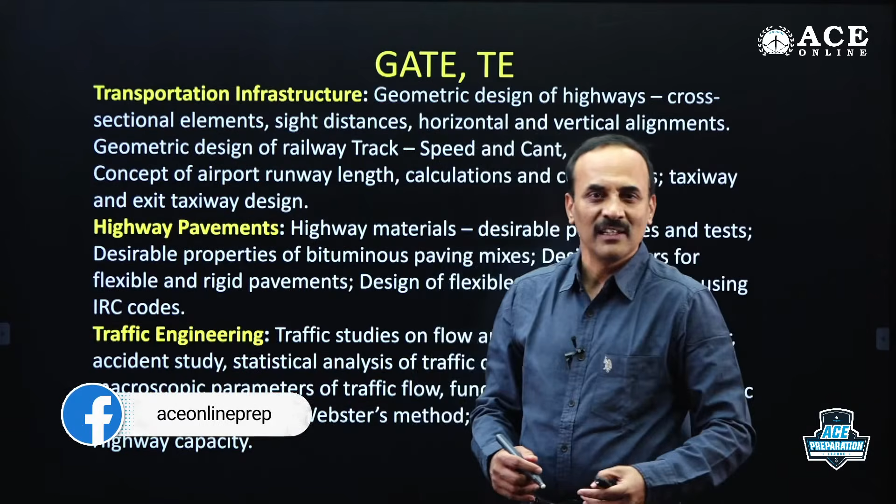Look at the syllabus of the GATE. GATE exam date has come now, 12th February. 2 sessions are there for civil, morning and afternoon session. For civil and mechanical, we have 2 sessions. For remaining all the branches, only one session for GATE. So the number of aspirants for GATE exam will be higher this year, similar to last year, and other branches might have slightly reduced. So coming to the syllabus.

Transportation infrastructure, here mainly geometric design is available - geometric design of roads, railway and airport. That is the first topic. And highway pavements - highway design, including material properties, flexible pavement design, rigid pavement design in the second part. And next is traffic engineering. Sometimes it may create little traffic jam also, so you have to be very careful about traffic engineering. Traffic engineering and the first part, transportation infrastructure, are having good weightage, and middle part has middle weightage.

That is what is generally observed from the previous year questions. So targeting good marks in transportation is easier, and especially if you want to join MTech structures in reputed institutes, you need to concentrate on non-structural subjects of GATE exam, like transportation, GT, environmental - you need to concentrate on these to join structures in premier institutes. That means you have good weightage on non-structural subjects compared to structural subjects.

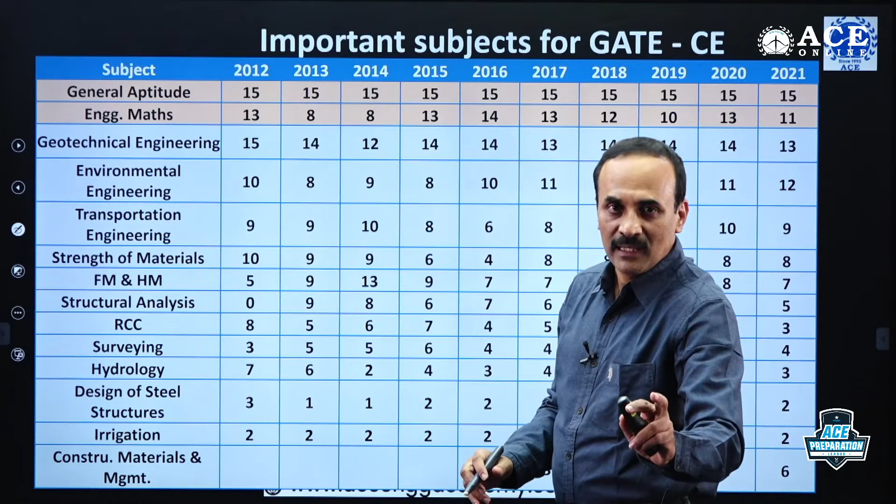You can look at this - transportation engineering weightage: 2012, 9. Slowly it increased, slightly increased in 2014, slight reduction in 2015 and 16, again peaked up in 19, 20, even 21 recent paper, 9. 9 means almost 9%, 9 marks out of 100, 9% - that is a good weightage. And GT is having around 15, 11, like that.

Syllabus point of view, simple, easy, formula oriented with little fundamentals, but if you are very conscious in the exam, if you are concentrating very well in the exam hall, then you can get full marks. Even slight deviation may cause mistakes - be careful. Especially we have to be very careful in the exam hall also, apart from the preparation level. First we will talk about the infrastructure.

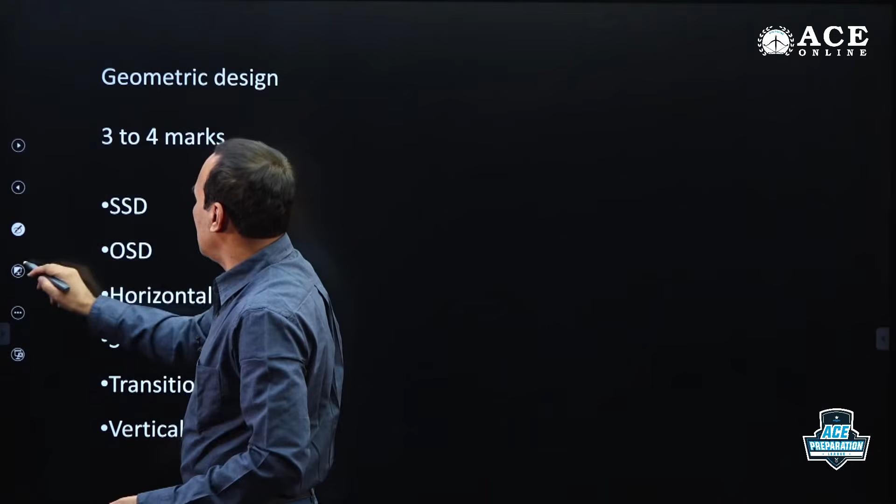Highway infrastructure, the main part is geometric design. The highway geometric design is having 3 to 4 marks of weightage. Most of the times it is touching the higher mark, 4 marks - maybe 1-2 marks question, 1 mark question, or otherwise 1-2 marks question, 1 mark question from geometric design. It's a big chapter, formula oriented, fundamentals of mechanics also required here, as these are the basic important topics I am talking about.

In 2020 onwards, slight variation has come in the syllabus. Starting from geometric design and gradients and all, the historical development and other things have not been included in the present GATE syllabus. The historical development, the plans, the introduction part is not included in the GATE syllabus. That may be there in ESE and other exams like SSC JE and all.

So you start with geometric design from gradients. From gradients, there is a chance of one theory question - maybe IRC specifications they will ask you, like gradient, camber, grade compensation. Grade compensation is an important area from gradients. Afterwards, you have the sight distances. From sight distances, very commonly, very frequently you are getting questions from stopping sight distance - very important area.

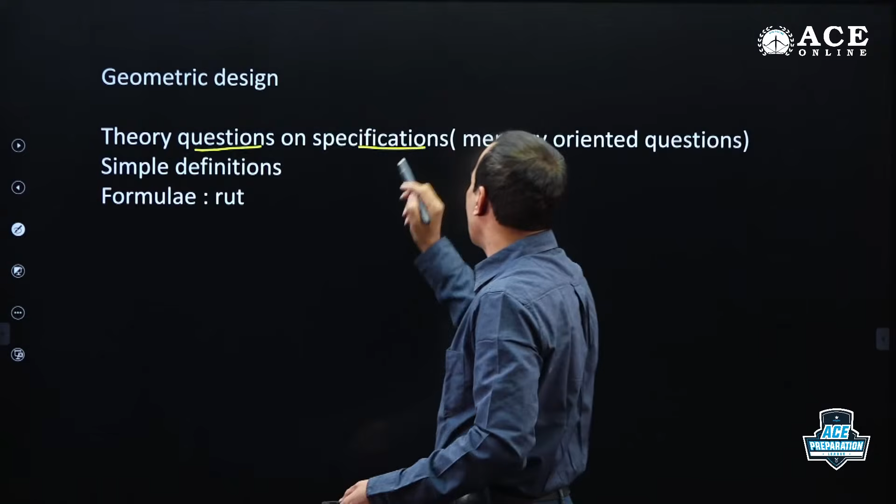Specifications you need to memorize, you need to learn by heart. So definitions may come, simple definitions, and simple instruments whatever you are using for different purposes, like what is unevenness index, how do you measure unevenness index, like that. Some little instruments they may ask you, but all the formulae you need to memorize, you need to learn by heart.

So every day you need to revise the formulae. Morning you need to spare some time, maybe 20 to 30 minutes, and you need to revise the formulae. Even though you are very strong, very intelligent, the top-notch intelligent, you can derive the formula and solve the problem.

But in the exam, the main requirement is time. You need to solve it within time. So you need to work accordingly, you need to act in a smart manner. For that, the formulae you need to learn by heart.

Even though you are topmost intelligent, you can derive and substitute and get the answer, but the person who memorized the formulae can solve the problem just in seconds, earlier than an intelligent person. Finally, the score matters. Whoever is getting a good score and good rank will be treated as intelligent. So be careful about the strategy of preparation.

Formulae are very important, and specifications, not all the specifications of the code book. Important specifications which are frequently getting repeated, those things you need to concentrate on. So the code book is important, but writing all the specifications of the code book is a waste of time, because if you start memorizing all the specifications of the code book, it's a never ending matter. Time is not sufficient.

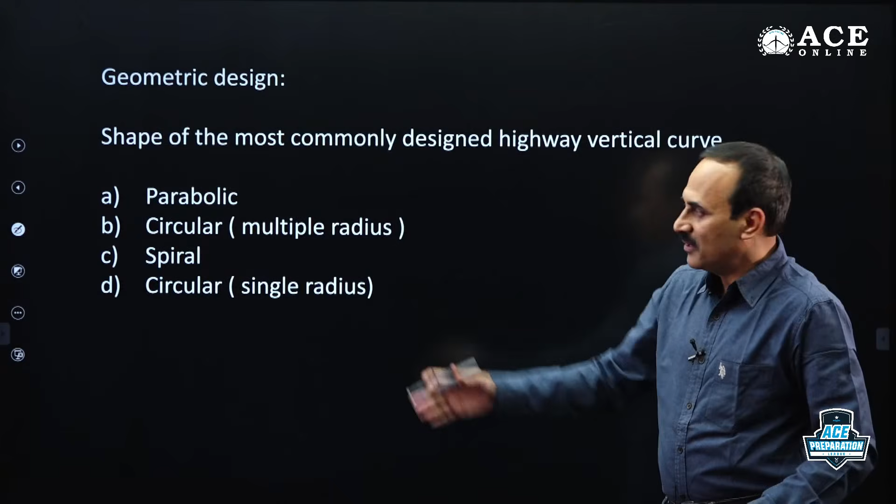1 mark questions may come, straightforward, simple, statement type of question. You can see this: shape of the most commonly designed highway vertical curves. They have not mentioned whether it is a vertical summit curve or vertical valley curve. But whatever it may be, you need to go through all the options and go by process of elimination. Don't just pick up the answer, especially in theoretical questions, you go by process of elimination.

Eliminate one by one, and the most appropriate answer related to the question you need to pick it up. So they are asking you related to vertical curve, what is most commonly designed in highway? Circular curve with multiple radius. Circular arc is the main circular curve we use, and that main circular curve is with a single radius. It is not the vertical curve.

Spiral is a horizontal transition we generally use as per IRC. Circular with multiple radius, we generally use for compound curves or otherwise for reverse curves. You might have come across this in survey. So parabola is the most appropriate answer.

Actually speaking, for summit vertical curves we use second degree parabola, and for valley curves we use cubic third degree parabola. Anyway, vertical curve is parabola. Straightforward question, unless otherwise you have the concept and revision on the concept, you can't pick it up within time. The answer can be picked in maximum 10 seconds of time, not more than that. Such a simple question.

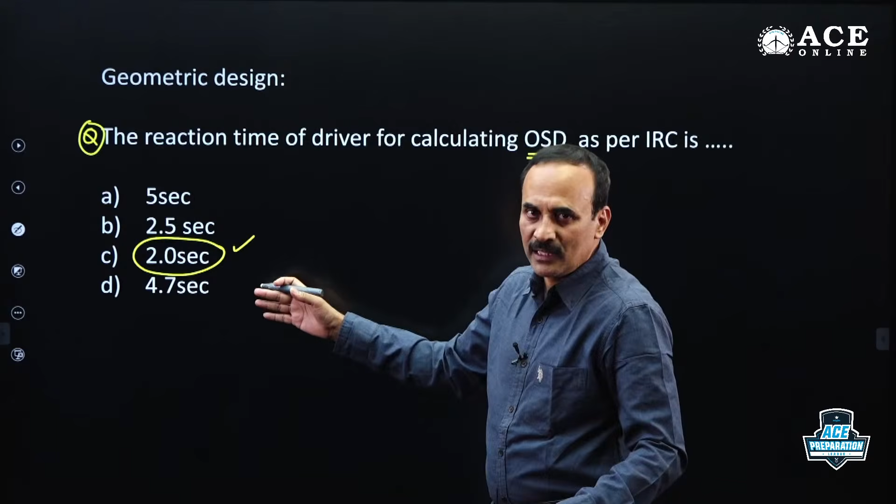In overtaking sight distance, the reaction time is 2 seconds. In stopping sight distance, reaction time is slightly higher, based upon the PIEV theory, it is 2.5 seconds, that you know. So what I mean to say is, read the question properly, whatever is asked, identify and pick up the answer based on that.

They are saying that lateral friction is completely developed, meaning you are mobilizing the lateral friction. So what is the maximum lateral friction possible as per IRC? Longitudinal friction, whatever we use in stopping sight distance, is 0.35 to 0.4. Lateral friction will be 0.15. This is to be assumed because this is not given.

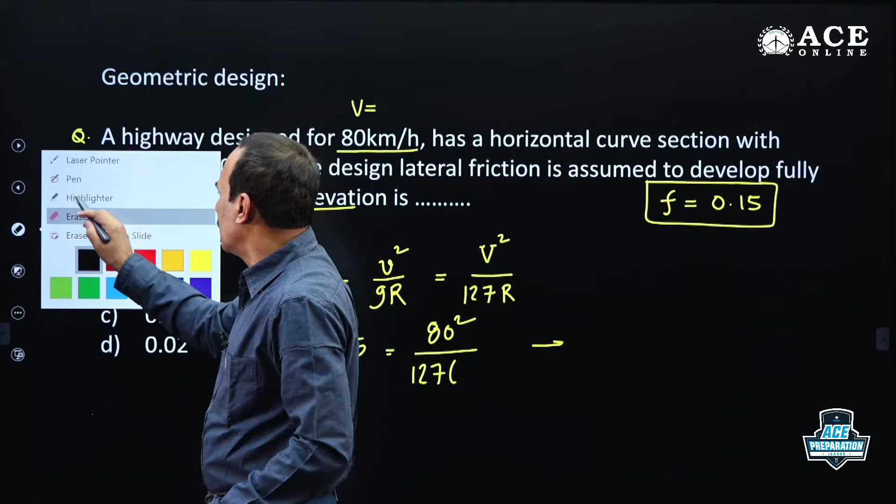Radius is 250 meter. So what is the super elevation, and which option is matching? Okay, most of the people are saying option C, C, C. Let us see - you are saying C, let us see. 0.05, correct. 0.052 will come, you can round it to 0.05, the nearest option.

So it's a simple question only, for this to solve you require... very good, so many people answered it, good, good, good. Okay, so you can pick up the option as option C - a straightforward memory oriented question.

Especially to target good marks, if you want to score around 50 to 60 marks out of 100, simple main questions you just go through and then hit the target. And if you are aiming for 90 plus out of 100, then you need to go for rigorous preparation, nook and corners you need to touch. If your target is around 50 to 60 or 65, 70 marks, the basic fundamental things you rote and practice well, go for the exam, definitely you will get that particular range of marks. If you want to target more than that, you need to go for nook and corners. What some people will do is, they may not have a proper strategy, but they'll focus on 90 plus marks.

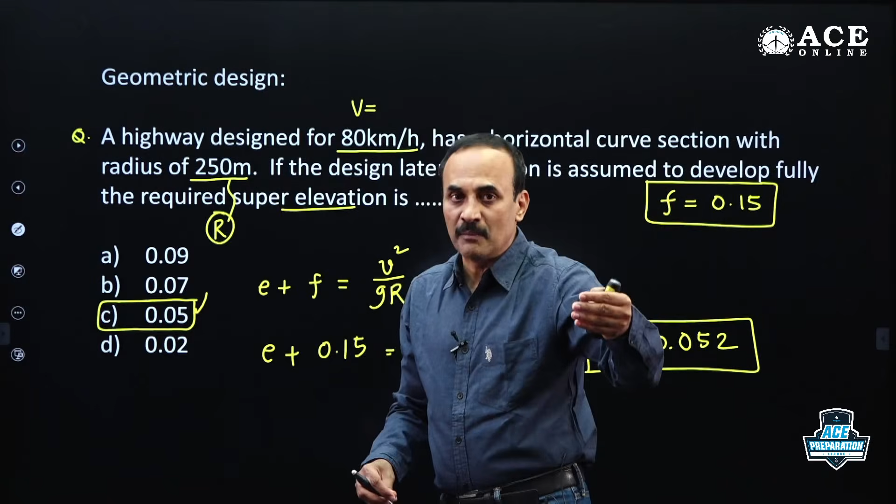Finally, they could not even qualify in the exam. So first assess your level, what is your fundamental strategy at present. You need to assess yourself honestly, and based on that, target your preparation.

Look at this question, it's a simple question based on gradients. They are asking the correct descending order of steepness of the camber. Camber is a cross slope that drains away water. A superior, good quality road requires less camber because it can drain away water easily without much trouble.

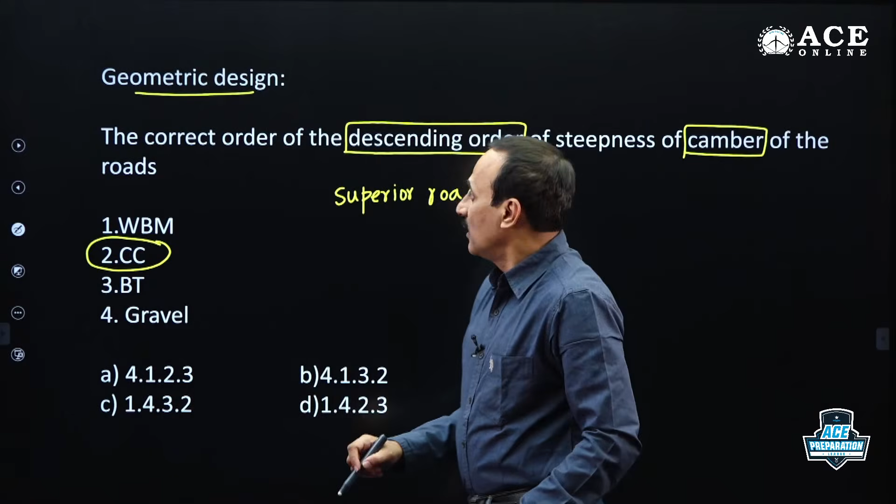Among these, which is superior most? As you know, cement concrete is superior, so it should be ranked 1. You need descending order, meaning high to low, higher value first and low value next. So cement concrete is superior most. Which is inferior among all? WBM, BT are there, but gravel is inferior among all. So inferior should have the highest rank number, meaning you need to start with 4.

In the options, the first should be 4. That means option C is gone, option D is also gone, two options eliminated. We have the tug of war between option A and option B. After gravel, the next inferior is WBM, so after 4, 1 should come. Here 4, here 1, here 4, here also 1 - so we can't pick the answer yet. Go for the next one. After WBM, BT will come, and superior most is CC, so next 3 should come, meaning here next 2 is there. 2 is there means you can eliminate option A, and the available option is option B. Like that, go by process of elimination.

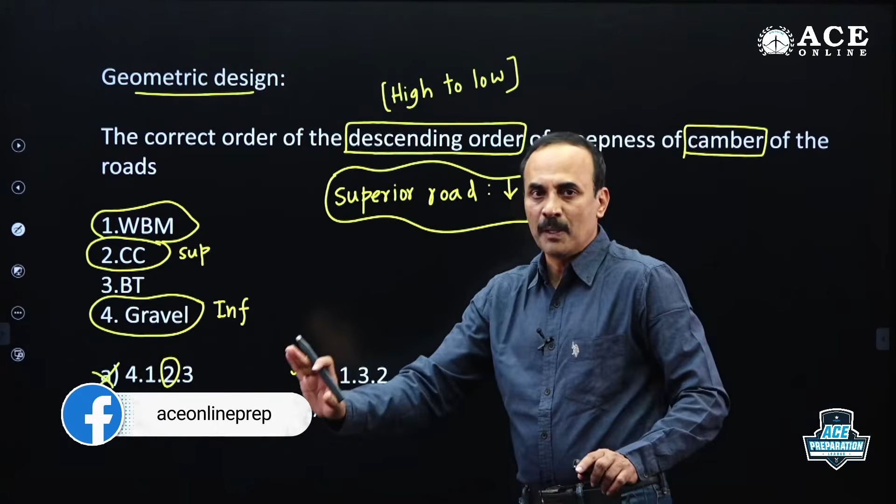No need to memorize the camber values to answer this. If you have a little idea on this point, you can pick up the answer. That's how you prepare for the exam. Most people answered this correctly - Harish, Anand, Ajay - all gave Bombay as the answer, which is correct. We will move to the next question.

This is also a fundamental, mechanics-oriented question. Look at the question - such questions are very common in ESE, and there may be a chance of such a question in GATE exam also. You require linear motion equations for solving these problems. Read the question: a vehicle was stopped in 2 seconds by fully jamming the brakes, by full pressing of the brake.

The skid marks measured 9.8 meters, so the distance skidded on the road is 9.8 meters. The average skid resisting coefficient, F, is the coefficient of longitudinal friction or linear friction that they are asking you. So what's happening is you are going by a car.

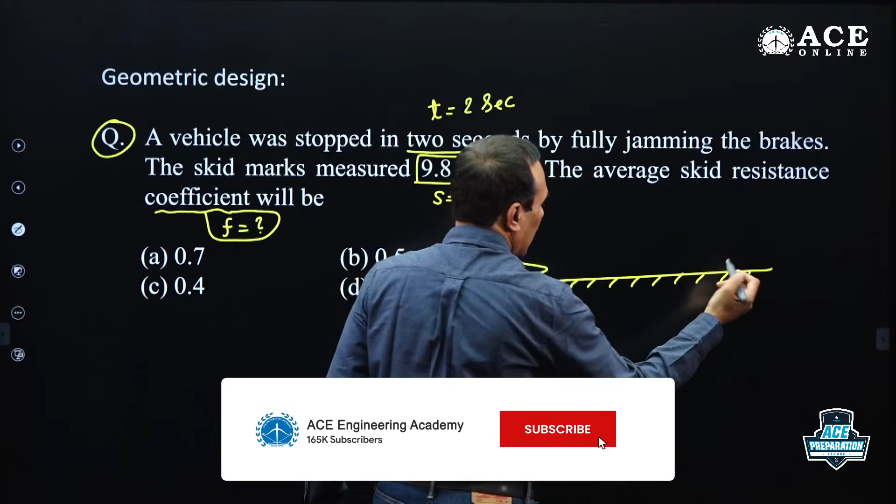Assume you are going by a Benz car. You suddenly stopped it - sudden application of brake is done. So the vehicle skidded for 9.8 meters, that is the skid distance, and finally it has stopped. Final velocity is 0. What is the time of travel? 2 seconds. Initial velocity I don't know - it is not given, and not required either.

But you require the coefficient of longitudinal friction. You know that the coefficient of longitudinal friction is equal to retardation divided by acceleration due to gravity - A by G. A is retardation: once you apply the brake, the velocity decreases, and the rate of decrease of velocity is retardation, while the rate of increase of velocity is acceleration. So here retardation comes after the application of brake. You use the first linear motion equation to relate V and U.

The final velocity V is equal to U plus AT. Final velocity is 0 because the vehicle stopped after the application of brake - this is given to us. U I don't know, acceleration also I don't know, but it stopped in 2 seconds, so initial speed is equal to minus 2a.

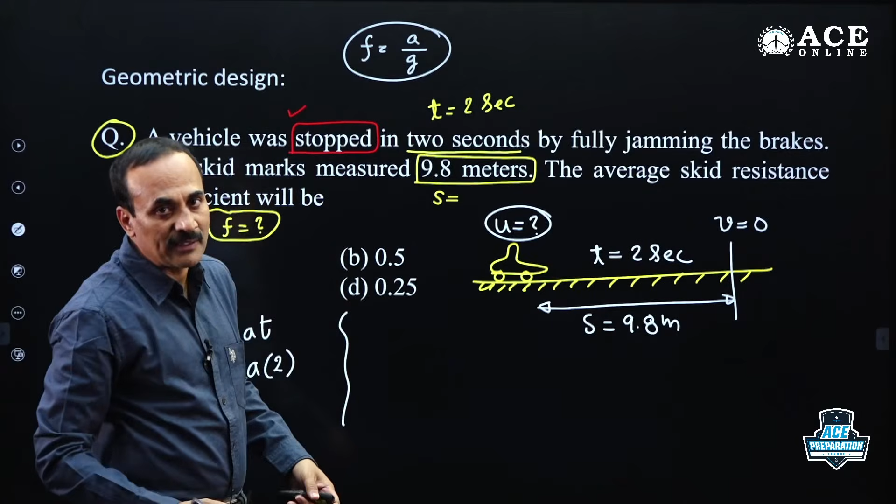From this equation, now you can use any other linear motion equation so that I can make use of displacement, nothing but the skid. I want the retardation finally. Shall I use S equal to ut plus half at square? You can use it. Otherwise, if you want, you can use v square minus u square equal to 2as. Any one - all are derived linear motion equations, you should get the same answer whether you use one or the other.

What is final velocity? That you know, 0. Initial velocity I am substituting as minus 2a, whole square equals 2as. What is this s? 9.8 meters. Now you can simplify and find the retardation: 2a square, the a gets cancelled, 4a minus of minus 4a, 4a is equal to 2s. Is it s by 2? 9.8 by 2.

Is it correct? Check up. Yes. Now what is f then? F is equal to a by g.

G is 9.81, or 9.8 you take it. 9.8 by 2 into 9.8 you take it. 9.8, 9.8 gone, 1 by 2, 0.5 comes into the picture.

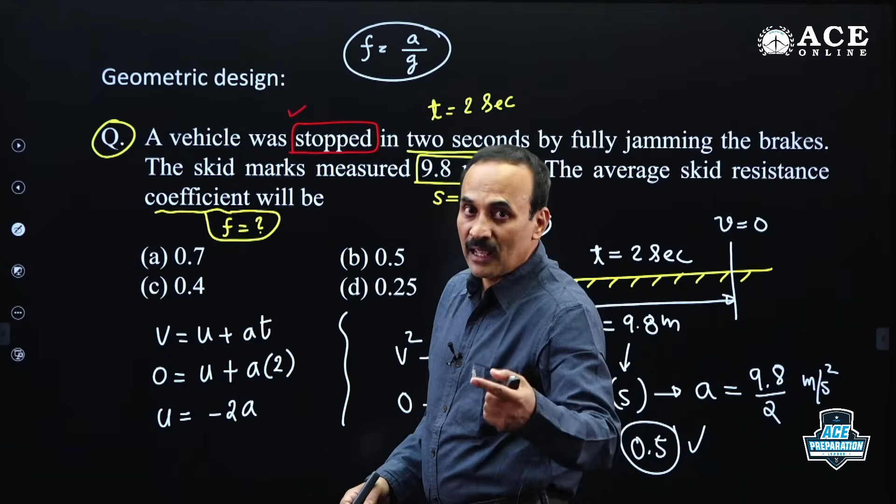So the option is 0.5, you can pick it up.

Okay please. Yes. Abhijit, Vishal, Ajay, PM, so many people give an answer. Very good, very good, very good. Bombay, Bombay, Bombay. Yes, Bombay.

This was a memory oriented question given in GATE previously. I have given this here because don't unnecessarily get panicked by this question. If such questions are coming, don't unnecessarily get panic in the exam hall. They'll give you some critical questions in the middle of the exam so as to decrease your confidence level.

Once you are a stable minded fellow, you leave the question and go to the next question. And someone with a slightly fluctuating brain, fluctuating mind, will look at the question, get panic, and their confidence level will go down by 20%. So for that, they'll give you such memory oriented critical questions.

That is what generally the question setters target on the students. Because question setters were also once upon a time students, they have come through all your stages and gone to that particular level of setting question papers. They know your feelings, they know your mental condition in the exam hall.

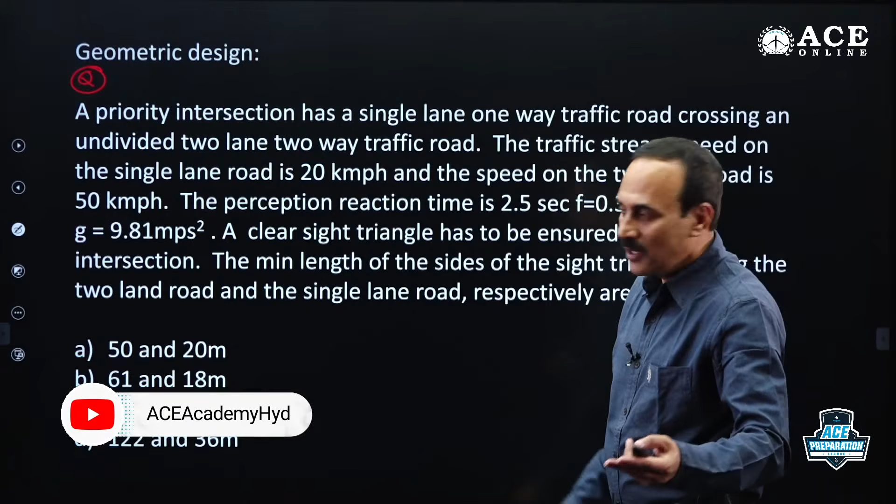You see, priority intersection. Even actually speaking, by the time this question appeared in the question paper, I was not aware of this. After that, I have gone through the code book and selected the answer. There is a condition, because going through all the specifications of the code book, writing all the specifications is not a part of the real requirement.

GATE exam is Graduate Aptitude Test. It talks about your aptitude, it checks about your aptitude. If such questions are there, only the people who are working in that particular area can answer the questions. Very few people who are in research of this particular area can do it.

Otherwise, people may think that there is something but can't recognize, can't recollect. Okay, don't worry about such questions.

What is asked here? A priority intersection has a single lane one-way traffic road crossing an undivided two-lane two-way traffic road. Two roads are crossing each other. The traffic stream speed on the single lane road is 20 kmph given,

and the speed on the two lane road is 50 kmph given. Acceleration due to gravity also given. Remember, in GATE exam, they will give you almost all the data. Very rarely, very common specifications they will skip. Something like in the previous question, lateral friction was skipped. Like that, very common specifications they will skip. Otherwise, they will give you.

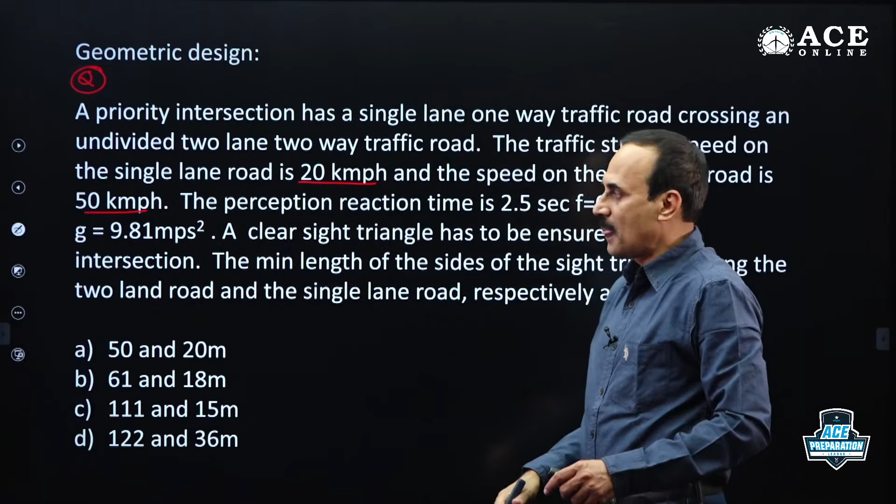Even acceleration due to gravity is given, you see. It's a GATE question. So what they are asking is, the clear sight triangle has to be ensured at this intersection. The minimum length of the sides of the sight triangle along the two-lane road first and the single lane road next, respectively, are.

Actually, there is a junction like this. Yes, this is in a priority intersection. In a priority intersection, vehicles are allowed to move with priority. That means there will be signals, there may be other instruments or police to control the traffic. That is why a priority intersection will have priority movement of vehicles. Now, this is a minor road.

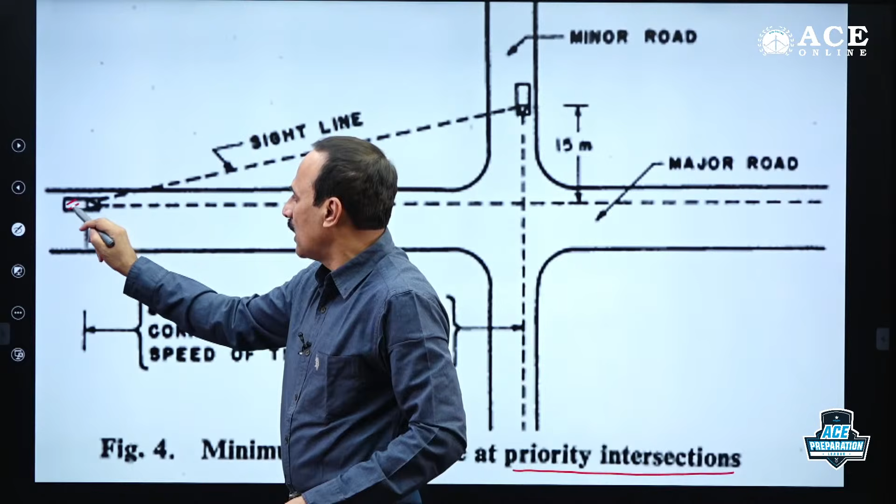North-south road is the minor road, east-west road is the major road. This vehicle is coming on the major road and this vehicle is coming on the minor road. This driver should see that vehicle, and this driver should see the vehicle from a certain distance, so that there is no chance of accident here.

For that, the major road requires more distance. They say you require a gap distance of V into T, where V is the design speed of that particular road and T is 8 seconds of time. This much distance is required for this driver to reach here.

And what about the minor road? For minor road, 15 meters is given - minimum 15 meter distance is required. That means at a distance of 15 meters, this driver should see the opposite vehicle on the perpendicular road.

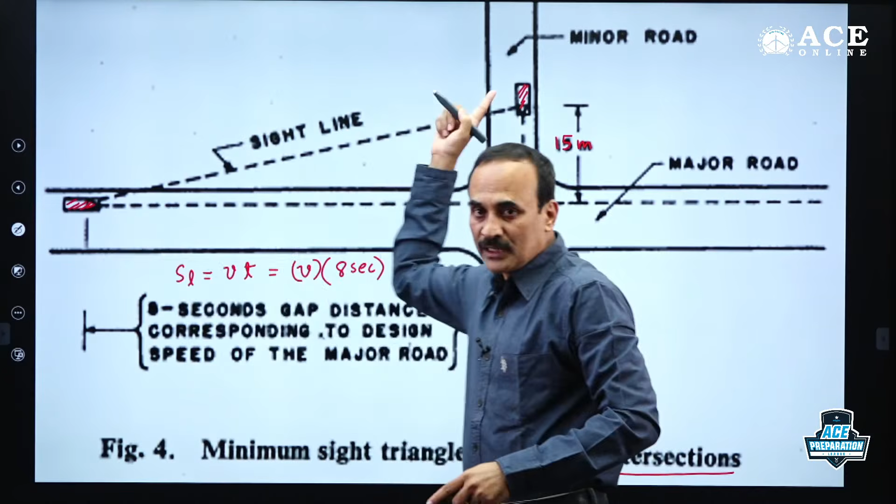And this driver should see the vehicle at a distance of V into 8 seconds. Then this fellow can control the vehicle and avoid the accident. If this is 15 meters, this fellow can control and avoid the accident. That means this is one side of the triangle, this is the other side, and this is the diagonal, given by the line of sight.

In this vision triangle, there should not be any sort of obstruction - no building, no compound wall, no parked vehicle, nothing. This should be clear. Then at this particular point, there is no chance of accident. As a designer, you need to manage it like that.

Even if by chance an obstruction is recently constructed, you need to go and dismantle it, you need to remove it. Nothing will happen because you are acting as per the provisions - even a court of law will not say anything. You need to give notice to the people, and if any illegal construction is there, you need to dismantle it. This area must be clear.

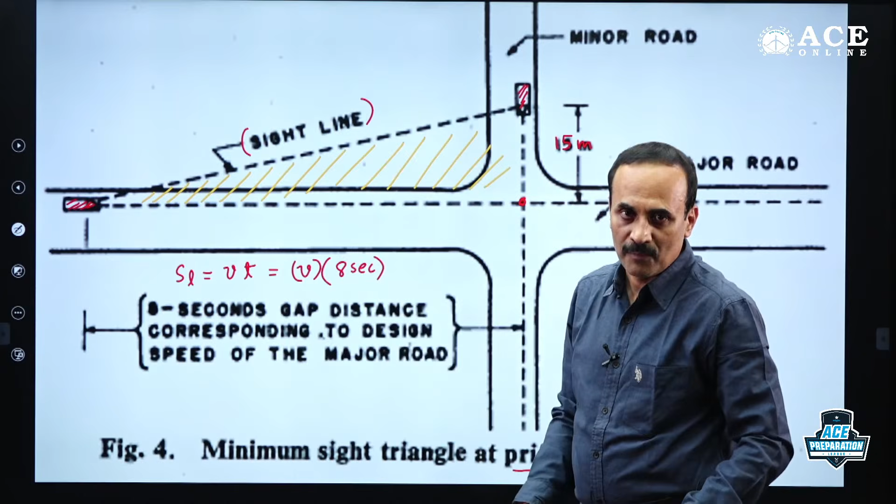This is for a priority intersection where there is prioritization by signals, police, or any other control. So minor road is 15 meters. Who will remember all these things? So they are asking you in the question as a priority intersection only.

And they are asking you: a two-lane road is the major road and a single-lane road is the minor road. What is the side of the triangle for major road and minor road? You know, for minor road it is 15 meters, just now we have taken it - no other case is it 15. On a single lane minor road, the side of the triangle is 15 meters, that we know.

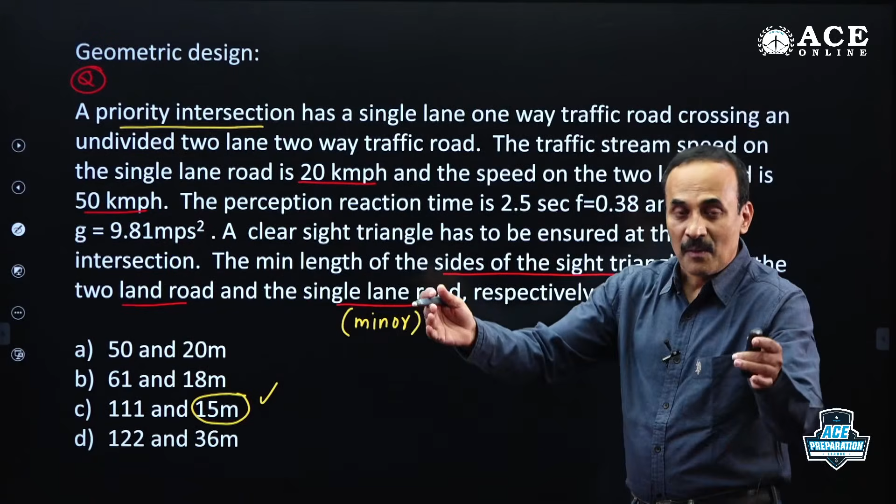With that you can pick up the final answer. It will be the design speed of the major road into reaction time of 8 seconds, the gap distance - it will be there, no need to calculate and cross check. If you have the fundamental and can recollect it in the exam hall, picking up the answer is very simple, but going through such fundamentals right before the exam is a very difficult task.

After the exam we saw this question and checked various codes and picked up the answer - that is not the correct approach. Prior to the exam you should have this in your mind. So whatever is given here is for an uncontrolled intersection. This is also given in IRC 66. This is okay, because uncontrolled intersection means no control, no police, no signal, nothing.

So this fellow is coming on this road, this vehicle is coming on this road, and this vehicle is coming on the other side of the road. There should not be any sort of accident here. So for that, this fellow should have a stopping sight distance of, say, SSD1.

That SSD1 is based upon the design speed of this road. As it is V2 given, I will make it SSD2 for road number 2, based upon V2. And what about this distance? This will be SSD1, based upon the design speed V1.

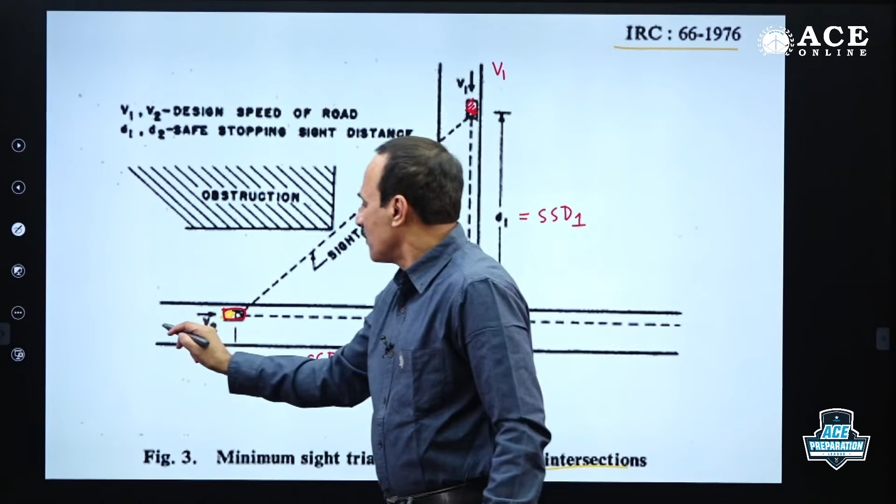Calculate SSD2 and SSD1 - this is one side of the triangle, the other side of the triangle, make the triangle, and this is our vision triangle. In this triangle, nothing should be there - no obstruction, no bushes, no building, you should not even park a vehicle.

Even by chance, if somebody parked a vehicle here looking at this empty space, there is definitely a chance of an accident and havoc occurring here. You have to be very careful about this point. That's why even parking a vehicle is not allowed.

That's why what people do is make this area slightly rough so that vehicles feel reluctant to park - it should always be kept empty. They make it slightly rough, even keep some small boulders, or otherwise grow some sort of garden whose height may not be more than 1.2 meters, the height of the driver's eyesight. So, such rare questions, don't target them.

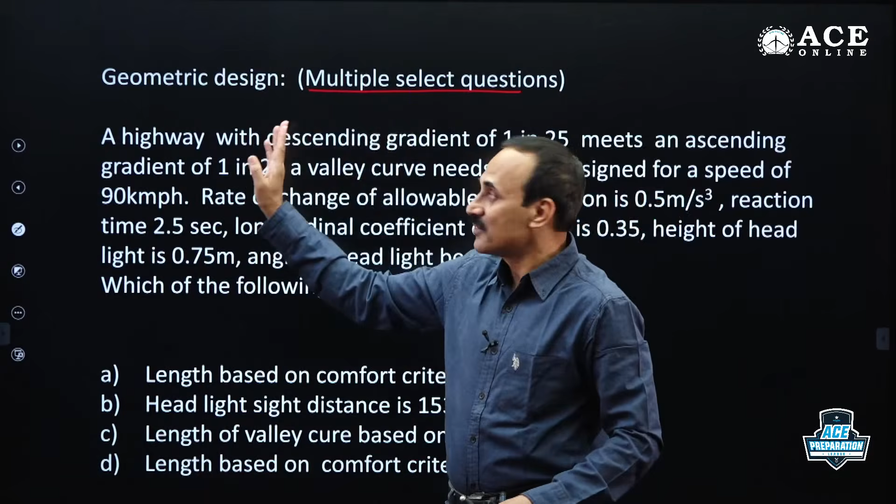We have three types of questions in GATE, as you know: multiple choice question, numerical answer question, and multiple select question. The problem with multiple choice questions is there is a negative mark - 1/3 negative comes if you put a wrong answer. In case of numerical answer question and multiple select question, there is no negative marking.

That is one side of the story, happy point. Multiple select questions were recently added in GATE 2021, no question was there in previous year papers, but in CSE there were so many multiple select questions in their recent paper. Computer science, electronics had one question, but civil had none. In future it may come, because this multiple select question will have 4 choices, and more than one may be correct. If you pick up all the correct answers, only then you get full marks, otherwise 0 marks, no chance of negative.

See this: a highway has a descending gradient of 1 in 25 meeting an ascending gradient of 1 in 20 on a valley curve. Oh, they are talking about valley curves. This needs to be designed for a design speed of 90 kmph. The design speed is mentioned as 90.

The rate of change of allowable acceleration is 0.5 meter per second cube - this is the rate of change of centrifugal or radial acceleration. Reaction time is given as 2.5 seconds for average driver based on PIEV theory. Longitudinal coefficient of friction is 0.35.

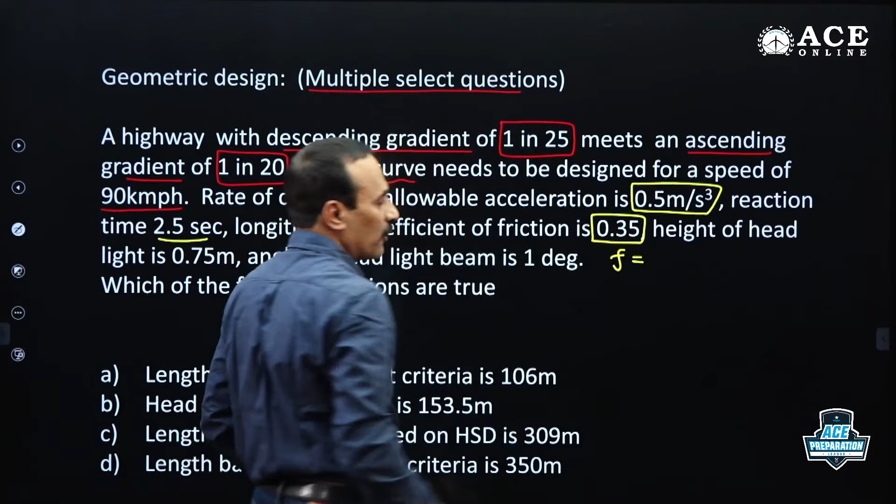Longitudinal coefficient of friction, we need to use it in SSD. Height of headlight is 0.75 meter, we call it H1. Remember, this is a valley curve, and angle of the headlight beam is 1 degree upwards, so as to cover more range of the headlight - the company setting of the headlight is 1 degree up, slightly up.

Which of the following options are true? Look at what they are asking you. Length based on comfort criteria - comfort means centrifugal criteria. Next is headlight sight distance they are asking in the second option. The third is length of valley curve based on headlight sight distance. Headlight sight distance is nothing but stopping sight distance.

Now for length based on the comfort criteria, two things are given, one may be wrong. 106 is given in option A, 350 is given in option D, one may be correct among them. You need to identify if option B and option C are correct or not.

This is a valley curve. First we will calculate the deflection angle of the valley curve, 1 in 25 and 1 in 20. Let me go to the next slide just for checking purpose. This is a valley curve: descending is 1 in 25, minus - I am taking minus for descending. Up is plus 1 in 20. So you have the valley curve in the middle like this.

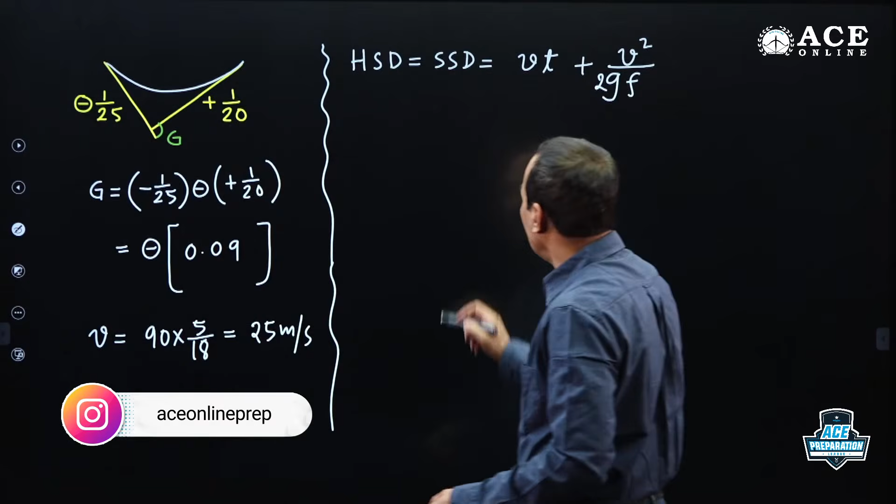So substitute 25 as the speed. The reaction time of the driver is given to us. How much is the reaction time? 2.5 seconds.

V square, you need to use an online calculator. 2 into G also given to us. Is it given? Acceleration due to gravity is not given, you assume 9.81. Coefficient of friction, longitudinal friction 0.35.

Simplify and give me what is HSD, nothing but SSD. Yes, yes, please. Paran Raj got 153.67. 153 point... okay, 153 Ajay will take 153.5.

Okay, first part is over. Answer is matching, matching, matching.

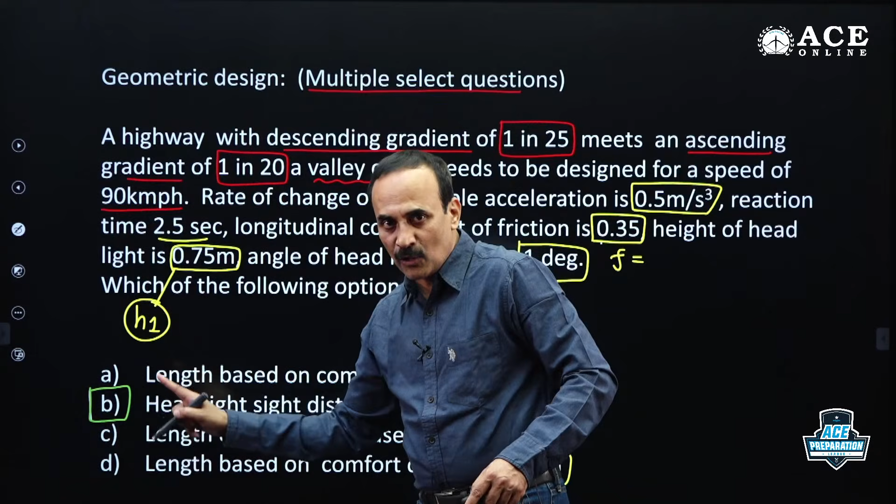If you select two options, both can get selected for a multiple select question. In a multiple choice question, if you select option A, that gets selected. If afterwards you select option B, option A's selection will go away and option B gets selected. That is what generally happens.

So headlight sight distance first is correct, B is correct. Length based on comfort criteria we will take. So what is length based on comfort criteria? Comfort or centrifugal criteria?

Centrifugal force will be causing a lot of trouble on the valley curve because weight is acting down, and centrifugal force is also acting down. On summit curve, centrifugal force is not a criteria. On valley curve, centrifugal force is a design criteria.

We will take two cubic parabola transition curves and join them symmetrically. LS is a cubic parabola transition curve, so two parts joined symmetrically. This is GV cube by rate of change of acceleration under root, nothing but whole power 1 by 2.

Substitute all and give me the answer. Don't forget to take 2. Don't forget to take whole power 1 by 2, or root. People may forget this multiplication of 2, some people forget this root. Be careful, these are the common mistakes people generally commit.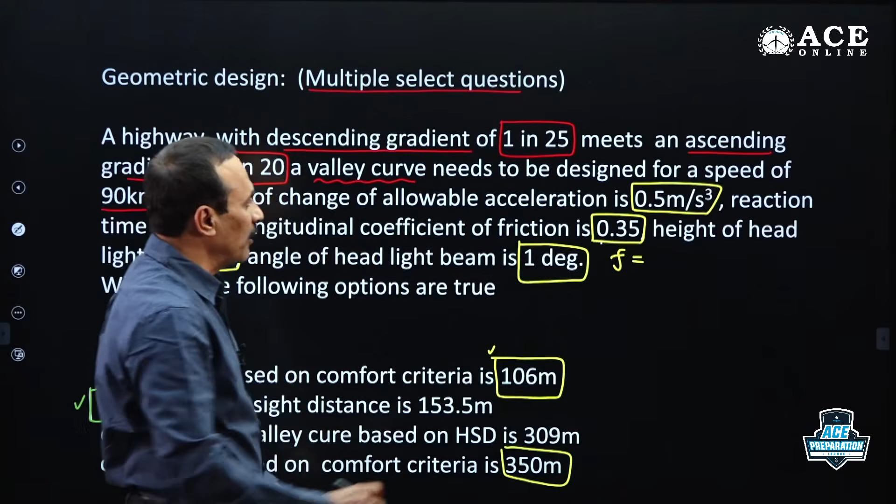So speed is 25, G is 0.09. Rate of change of centrifugal acceleration is given, it is 0.5 meter per second cube. For valley curve, IRC recommends using 0.6 meter per second cube, but they have given 0.5, so whatever is given you need to choose it. So take 0.5, root over.

What is the answer please? 106. Correct, Mahesh, Satish, Ajay, yes.

Is it matching as the correct option? Comfort criteria, length based on the comfort criteria is 106. So option D is gone, option A is the correct option. I will put it in green color, correct.

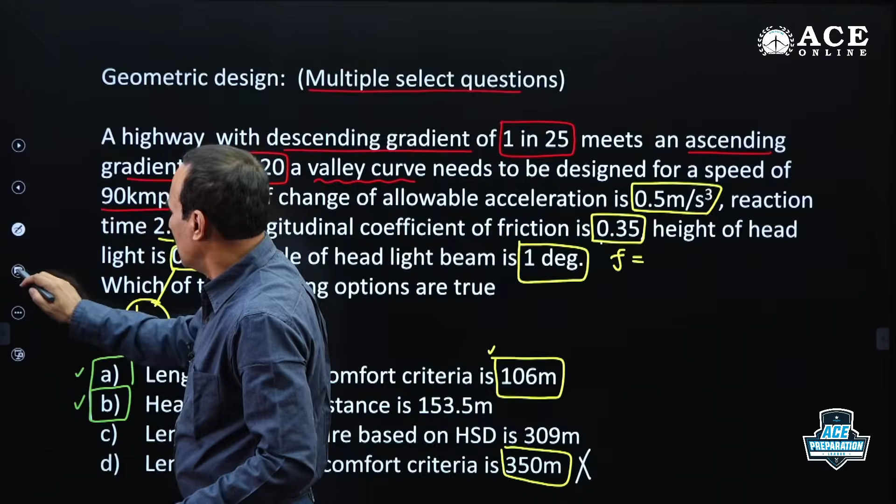Length of valley curve based on headlight sight distance is what they are asking. So headlight sight distance is also based upon HSD, nothing but SSD. So headlight sight distance, HSD criteria, HSD nothing but SSD criteria, sight distance at night.

Here there are two cases, we need to assume L more than or equal to S, nothing but HSD. In most cases, this is the criteria which is generally suitable for us.

The value is GS square divided by 2H1, the height of the headlight above the road surface, 2S. S is the sight distance, nothing but HSD, tan alpha. Alpha is the angle of the headlight beam, alpha is taken equal to 1 degree. Height of the headlight over the road surface is given as 0.75 meter.

And S is our HSD, whatever you have calculated, that you substitute. G is 9% gradient, 0.09. Now give me what should be the length.

Let us see how many of you solved it. Oh, A, B, C are correct. Solanki, Raj, very good.

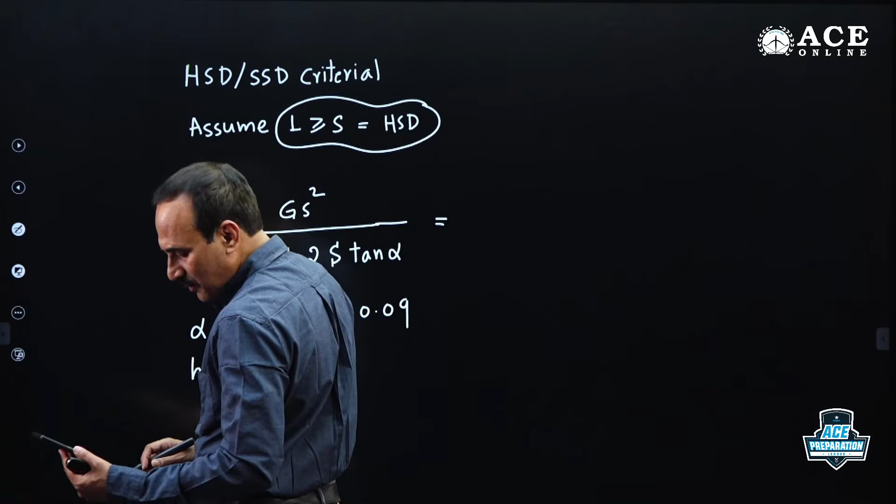Jerry, so this is... what is the value? 306. 308.6, okay, 309.

After you calculate this L value, you need to check whether the assumption is correct or not. L is 309 - is it more than S or not? L calculated is more than our S, HSD, that means the assumption is correct. If by chance the assumption is wrong, you need to go for the second formula and recalculate the length again. So presently the assumption is okay.

The HSD value, whatever you have calculated, is 153.5, right? Okay, length is 309, which is more than 153.5. Assumption is correct. You can pick up the answer - which is the correct option? So 309, this is also correct option. So answer is A, B, C are correct.

Delhi Khan, you can select the three options. Time taking question. Okay, we'll move to the next.

Time is almost 6:57. Look at the question, I'll just give you the procedure. A horizontal circle - this is based on the setback distance, this is based upon the setback.

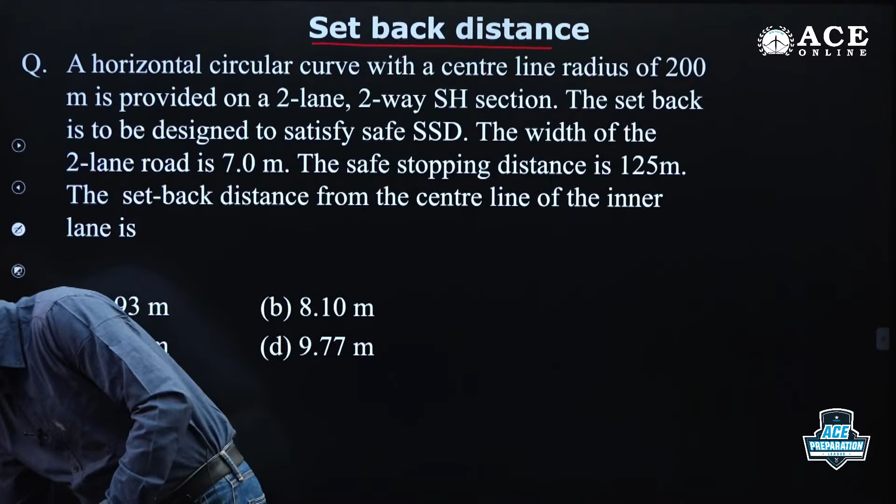A horizontal circular curve which has a center line radius. Radius is always taken up to the center line of the road only. If radius is 200 meter, that is from the center of the radius to the center of the entire road. Radius, if somebody says radius, it is center of the entire road only.

On a two-lane, two-way highway it is given. Two-lane, two-way is a two-lane road. What is the width of the road is also given as 7 meter. The safe stopping sight distance is given as 125 meter. The setback is to be designed to satisfy safe SSD. It is mentioned - actually, two-lane, two-way road, overtaking is also allowed. But they wanted to design the setback only based upon the SSD.

If you don't read this line, whatever is underlined with red color, you miss the answer. It's a two-lane road, overtaking is allowed, but they don't want to allow overtaking sight distance. They wanted to calculate the setback distance - nothing but the distance of the obstruction on the inner side of the curve based upon the safe SSD.

Okay, safe SSD value is also directly given to you. The setback distance from the center line of the inner lane they are asking - this point is also slightly crucial. I will underline with green. From the center line of the inner lane they are asking. We will check up. We will go to the next slide.

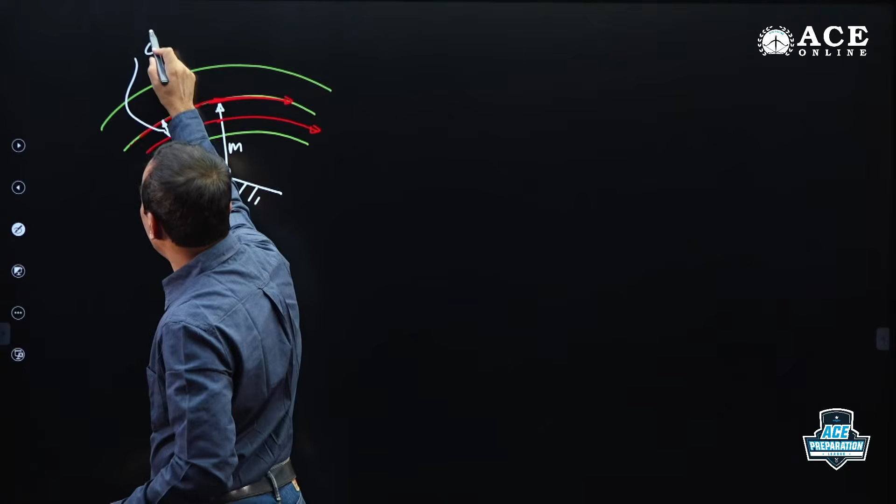Small d - how much is small d value? Total width of the road is 7 meter, that is nothing but 3.5 here, 3.5 meter here also. So small d is 3.5 by 2, nothing but 1.75 meter.

First of all, the setback distance we need to assume - if nothing is specified, we always assume L is more than or equal to S, which is presently safe SSD. How much is the safe SSD now taken? 125 meter. Assume L more than or equal to S - that's what we generally start.

So setback distance for multi-lane road is R minus D you need to take - remember this? Cos alpha by 2. This setback distance is from the center line of entire road to the inner side of the obstruction.

Now alpha, how do you calculate alpha? Alpha is based upon the arc length. Arc length is the sight distance, equal to R minus D, because the sight distance is for the critical vehicle which is moving on the center line of inner lane. So arc length has a radius of R minus D, and we require arc length equal to the sight distance, the safe sight distance, R minus D into alpha.

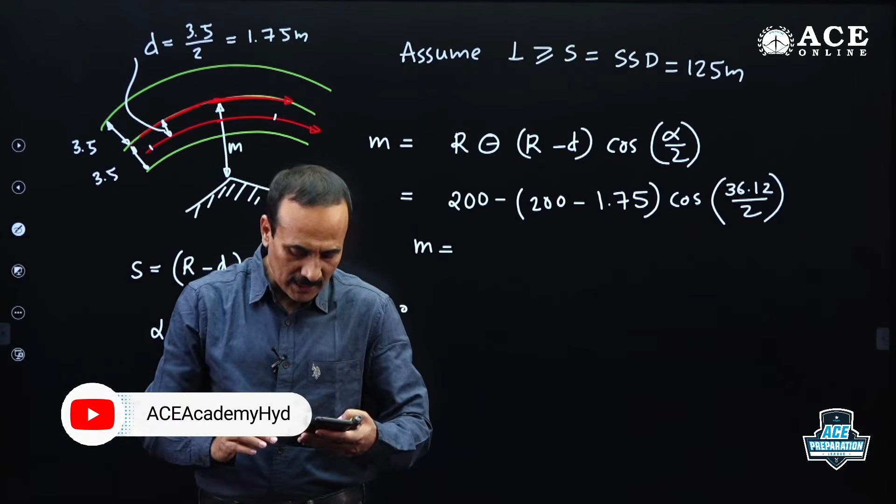So this is the setback taken from center line of entire road to the inner side obstruction. What is the value please? Yes, 36.12 is alpha. Prasad correct, Nagsai correct, Ajay correct, Jerry correct, very good.

Now what is this M value? 11.52. But what they are asking you in the question is, that is a twist in the GATE question. They are asking you setback distance from the center line of the inner lane. Whatever you calculate is directly from the center line of entire road, but they are asking you this distance, m dash distance.

So from the center line of inner lane to inner side obstruction is m dash, that will be m minus d, 11.52 minus 1.75. If you are not reading the question carefully, there is a chance of committing mistake like this. Around 20 to 30% of the people, they calculate m and substitute that as an answer. But actually that is not the correct answer. M minus d is the correct answer. That's what we require to substitute.

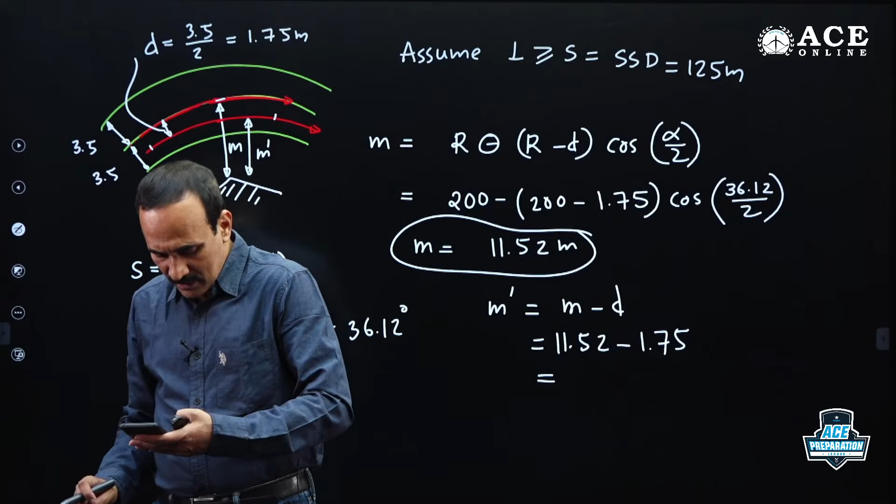So what is m minus d? Yes, very good. 9.76.

This is the way we need to solve the questions. In gate question, if you are not reading the question properly, you can go onto the negative if it is a multiple choice question. Otherwise, you can touch 0. Pavement design carries 1 or 3 marks, not more than that. Not so critical and important.

We have flexible pavements and rigid pavement, and targeting questions here will be easy. In flexible pavements, they are asking you mainly the vehicle damage factor calculation, or convert everything into standard axles. Vehicle damage factor or number of standard axles. What is standard axle? The rear axle of a lorry, we treat it as a standard axle. Rear axle of a normal lorry will have left 2 tires, right 2 tires, connected by axle. So dual wheel single axle is the standard axle.

What is the load acting on that? As per IRC 2018 version, IRC 37 2018 version, 80 kilonewton is the standard axle load we'll consider. We need to convert everything into standard axles. We count the traffic on the road, we'll take all commercial vehicles. Commercial vehicle is nothing but the laden weight more than 3 tons. Laden weight means dead load plus live load more than 3 ton, we call it a commercial vehicle that can damage the road. That's why we consider only commercial vehicles in the design of pavement. Car, cycle, rickshaw, auto we don't consider because they won't damage. Lighter loads won't damage the road.

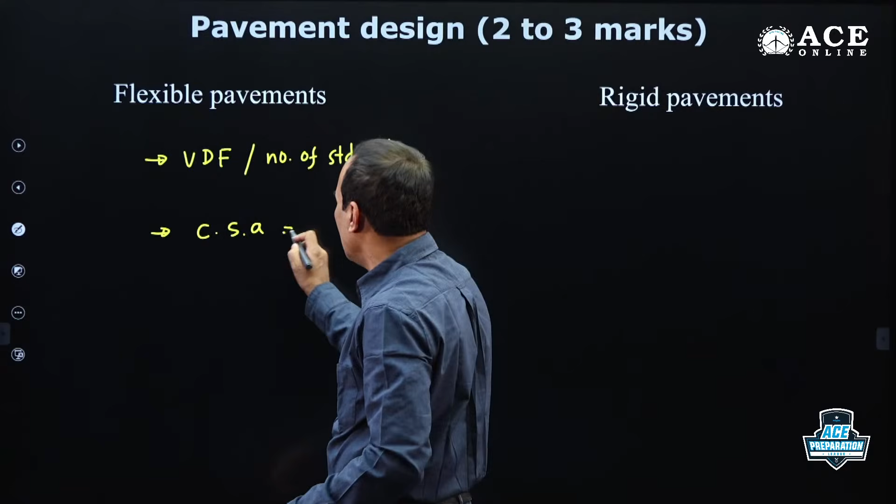You remember that formula? 365 days of a year divided by R, probability based formula, 1 plus R power n minus 1 into the traffic at the end of construction is A, in terms of CVPD, commercial vehicle per day, lane distribution factor, vehicle damage factor. So vehicle damage factor calculation is important. That vehicle damage factor we'll use it in the cumulative standard axles in the life of the pavement.

A is the traffic at the end of the construction, not at the end of the life. A is commercial vehicles per day at the end of construction, nothing but beginning of the life. D is the distribution factor. The distribution factor gives you traffic on a critical lane if the total traffic is known to you. The lane distribution factor you need to know by heart because sometimes in the question lane distribution factor values they may not give you, you need to know it by heart. There is a table in IRC, you might have come across that. This is what is generally asked in flexible pavement design.

Very commonly asked areas to calculate cumulative standard axles, and GATE point of view very important.

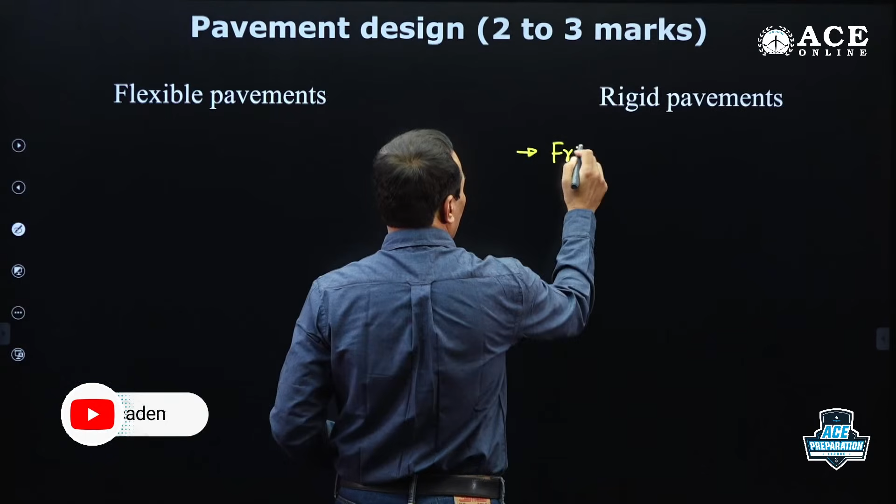Frictional stress calculation they may ask you. We have load stress, warping, friction. The frictional stress calculation you just go through, because that is based upon logic, based upon equating frictional force equal to resisting force. So frictional stress generally comes because of seasonal variation of temperature. Warping is because of daily variation of temperature.

So frictional stress calculation is important for us. Apart from that, the load combinations, critical load combinations. There is a chance of question on this, because you can solve the problems on critical load combination within specified time.

Three critical combinations are given in IRC. One is summer midday edge region, next is winter midday edge region, next is winter midnight corner region. Summer and winter relate to the frictional stress; midday and midnight relate to warping, daily variation of temperature in a day, or temperature gradient across the thickness of the pavement creating the warping. And

the wheel load stress is very common. We have three critical combinations. Interior is always safe, so we don't use it in the critical combinations. We have only edge and corner. So daytime edge is critical, nighttime corner is critical, from warping point of view.

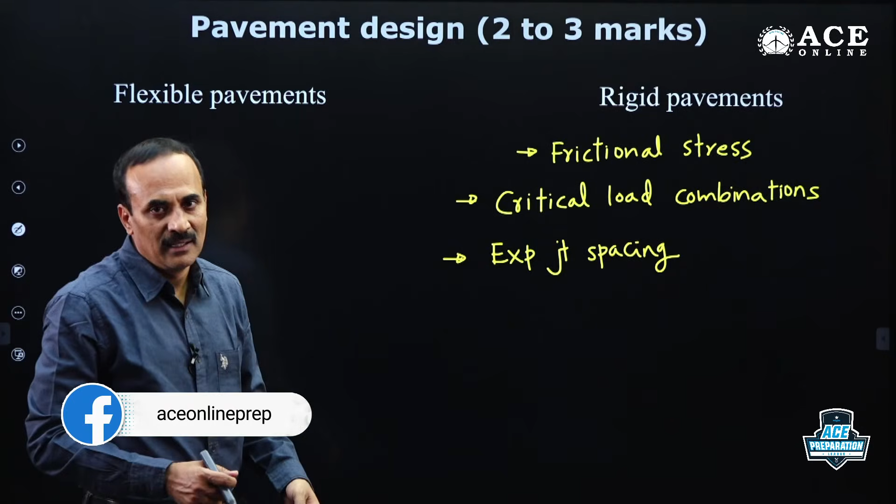Next, after that, expansion joint spacing, very similar to whatever you use in strength of materials. Change in length equals L alpha delta T, but change in length is taken equal to the gap by 2 at the expansion joint, because at the gap of expansion joint we use filler material, and that filler material is nothing but mastic pad, which allows only 50% of the gap for the pavement to expand, remaining 50% it occupies. Okay, that you know.

Next is the contraction joint spacing, also important for us. Contraction joint spacing in plain cement concrete and reinforced cement concrete also.

Next is dowel bar. Especially the load carried by critical dowel bar they will ask you, not the entire dowel bar design. Dowel bar is provided at the expansion joint.

Next is the tie bar. In tie bar they will ask you the spacing as well as length of the tie bar. So these are the important areas on which you need to concentrate for GATE exam. In ESE exam and other exams they can ask you from any corner because of the theory parts, but from GATE point of view these are the important things in my point of view.

Okay. And be careful about theory questions which may come on the warping temperature stresses. We will just check up 1 or 2 questions on this pavement design. You can look at this, a theory based question.

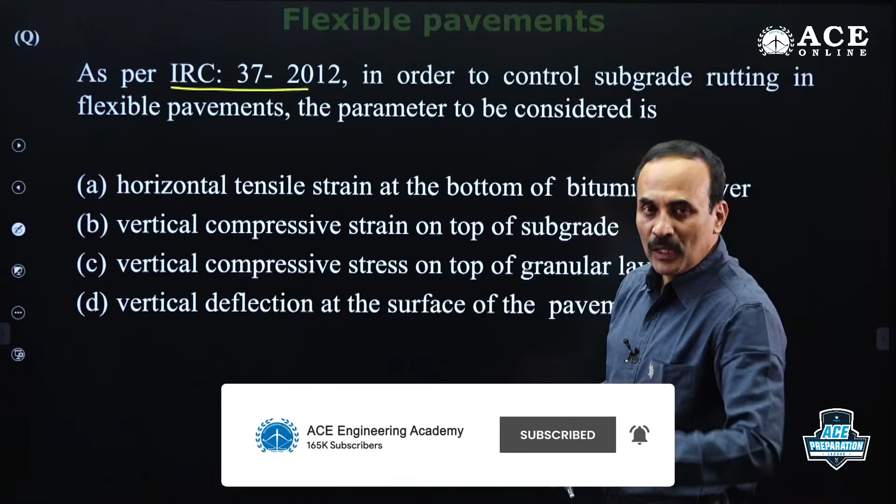As per IRC 37 2012, presently 2018 version is also there in the market. Once new version comes, old version goes outdated. In order to control the subgrade rutting,

the rutting in the flexible pavement, the parameters to be considered are, especially there are 2 serviceability or performance criteria. Load criteria is collapse criteria, like what you use in limit state method. The serviceability criteria or performance criteria are rut, fatigue. Rut is nothing but longitudinal grooves on the road surface.

Longitudinal grooves on the road surface, or rutting, is because of consolidation of subgrade soil. Subgrade is the lowermost natural soil, that slowly consolidates under moisture. The vertical compressive strain of the subgrade is considered in the rutting process. We calculate standard axles to create 20mm depth of rut. You remember? So for that, vertical compressive strain on the top of subgrade we use.

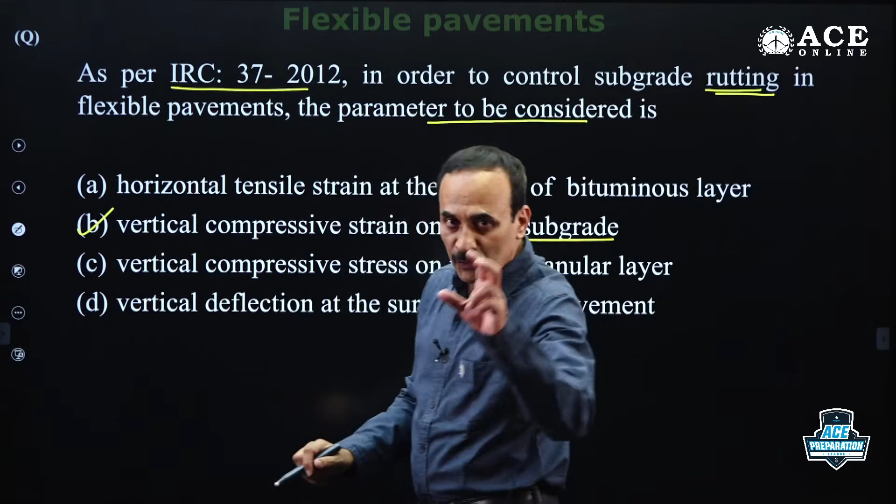Rutting criteria uses vertical compressive strain on the top of the subgrade. Fatigue criteria uses tensile strain on the bottom bituminous layer. If you have 2-3 bituminous layers like binder course, topmost wearing course and all, you need to consider the bottom bituminous layer on the bottom side. There may be a chance of tension that creates the crack. So rutting is based upon compressive strain on the top of the subgrade. Fatigue is based upon the tensile strain on the bottom of the bottom bituminous layer, that you know already.

So the formula of rutting, formula of fatigue, are very critical formulae. Don't even look at that formula. Don't even try to memorize it. After the exam, if you want, you can memorize it, not before the exam. By chance a question comes from that area, leave it. Impossible to memorize. Even if you memorize it today, within 2-3 hours you will forget.

There is a problem with such critical formulae. You might have come across fatigue cracks. Because of repeated wheel loads, you see micro cracks. Such cracks you can get on the skin also during winter, micro cracks.

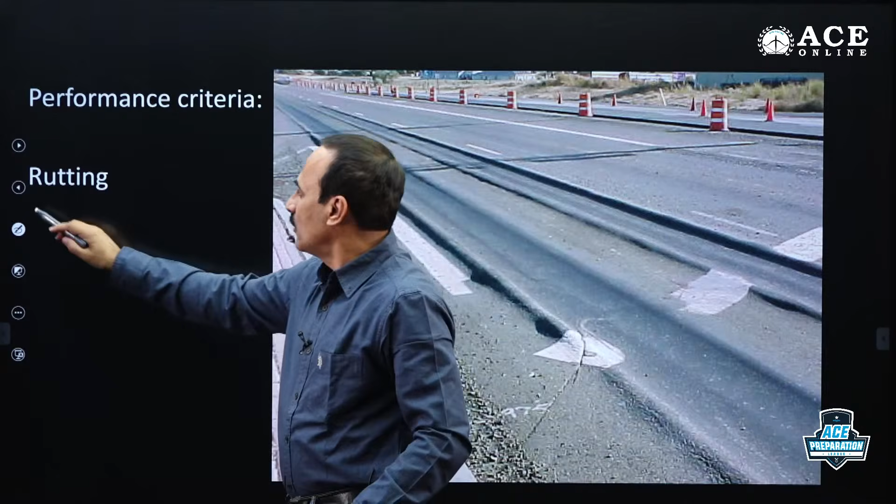Rutting is the longitudinal grooves, this is because of the consolidation of the subgrade soil. So rutting and fatigue come under performance or serviceability criteria, because the flexible pavement design uses mechanistic empirical approach, and we are using the modified CBR method.

Number of commercial vehicles on a highway are given as follows. All are commercial vehicles. What is a commercial vehicle? The total laden weight more than 3 ton is a commercial vehicle.

You have 100 buses with front axle 40 kilonewton and rear axle 80 kilonewton. 200 lorries or trucks with front axle load 50 kilonewton and rear 90 kilonewton.

What they are asking: calculate total number of standard axles in terms of standard axle load of 80, including front as well as rear. As per our IRC, front axles are usually ignored since front axle load is very less, and we take only rear axle loads. But here we need to consider front axle as well as rear axle.

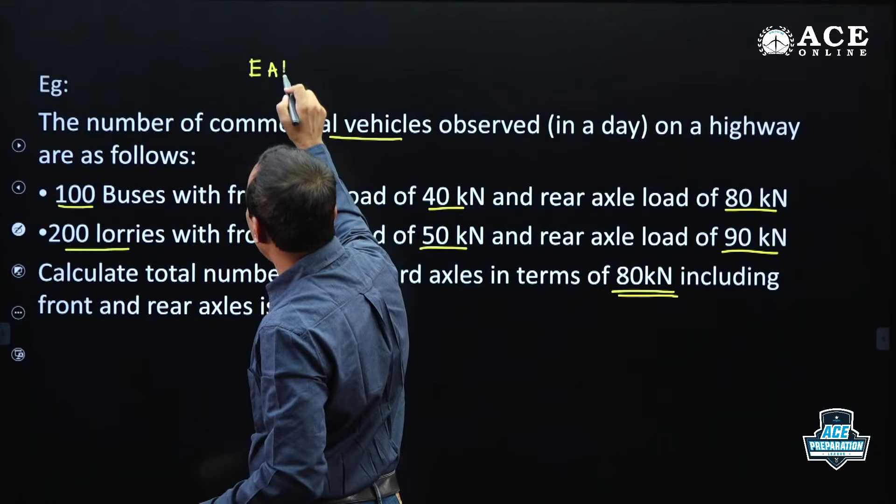So how do you convert everything into the standard axle? Based on equivalency factor. What is equivalency factor? Equivalent axle load factor or equivalency factor, both are the same. This is nothing but actual axle load divided by standard axle load, power 4, based on the 4th power rule. Don't ask me how it has come, it is based upon empirical approach, specified in the code book.

So, total number of standard axles. Standard axle means each axle will have a load of 80 kilonewton. You have 100 buses. What about the front axle? 100 front axles will be there, each weighing 40 kilonewton. Actual load is 40, standard is 80, raised to power 4.

So this gives you the total axles in terms of 80 kilonewton. Actually 100 front axles are there, multiply with the equivalent axle load factor, this gives the number of axles in terms of standard axle of 80 kilonewton. Next, bus rear axle: 100 buses, rear axle load of the bus is given as 80 kilonewton. Actual is 80, standard also 80. I will tell you this without calculator.

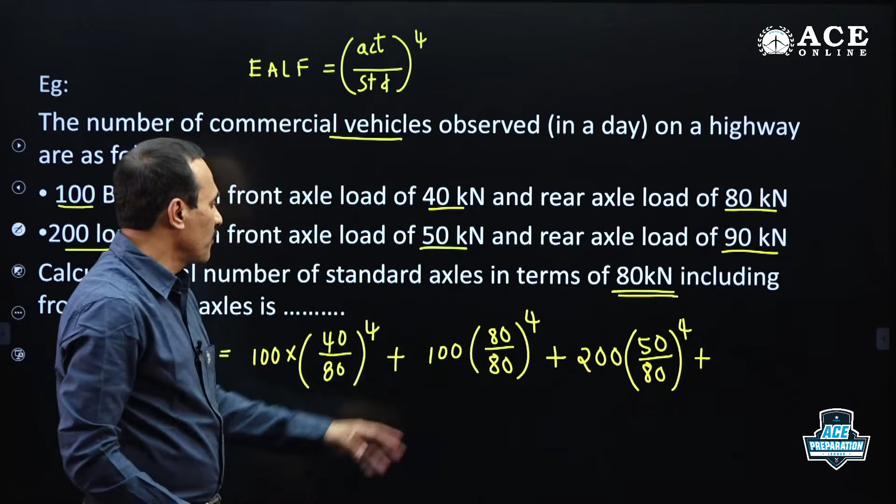Now come to the lorries. 200 lorries, front axle 50 kilonewton, but standard is 80. Make it with power 4. This converts the 200 front axles of the lorry into standard 80 kilonewton axles. What about rear axle of the lorry? 200 rear axles of the lorry, 90 is actual, 80 is standard. This is more than the standard. You take them separately, add them separately, then we will get the answer.

So what is the answer here? This will be 6.25. You see, even though 100 axles of 40 kilonewton, which is equivalent to 6.25 axles of 80 kilonewton. That's why IRC ignores the front axles - they consider only rear axles, and that rear axle converts into 80 kilonewton standard axle load. So this is 6.25, next is directly 100, next is 30.5.

Next is 320.36. Total sum you take it up. Sum of all will be 457, very good, 457.13 standard axles. So in this group, we have 457 standard axles. That's it, 457 axles are there.

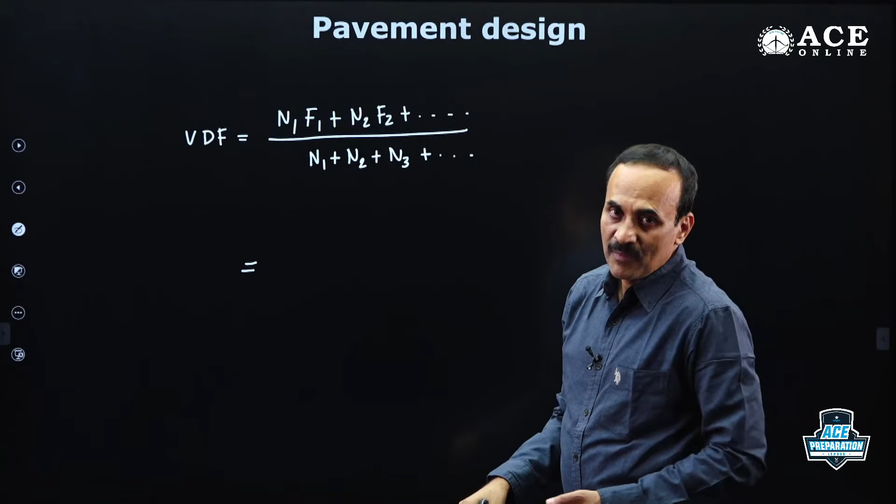How do you calculate this? N1 number of vehicles with damaging factor F1, N2 F2, like that, so on and so forth, divided by all the number of vehicles, so on and so forth. Can you calculate vehicle damage factor of the previous example? In the previous example, we have a group of vehicles, 100 buses and 200 lorries. So equivalency factor N1F1, N2F2, N3F3, N4F4 is given by 457.

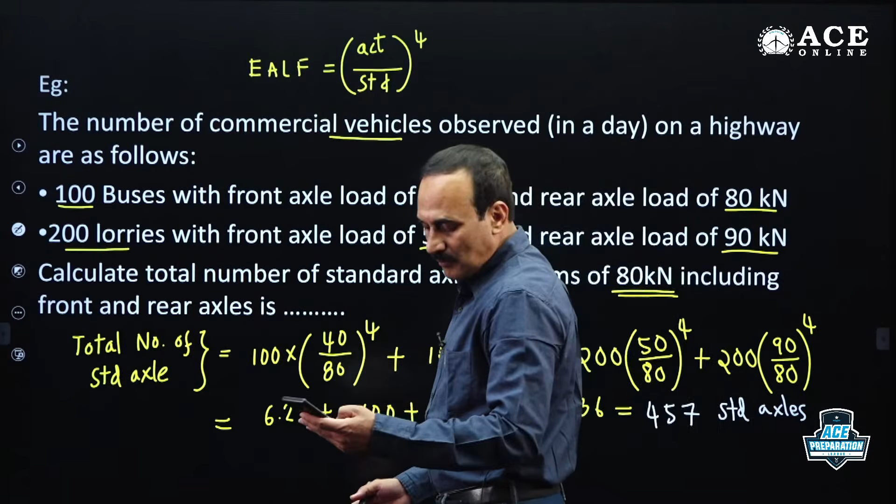Okay, Ajit? 0.762, very correct. Okay, okay, okay.

This is based upon the cumulative standard axle loads. They are asking you to calculate the cumulative standard axles. Such a question is coming every year almost, every time almost.

There are two axle trucks and tandem axle trucks. Two axle truck is a small lorry. Tandem axle truck, the two axles may be like this, very close to each other, this is a big lorry. You have two axles very close to each other on the back side. This is a heavy lorry, that's why it is having a different vehicle damage factor, more or less depending on the case.

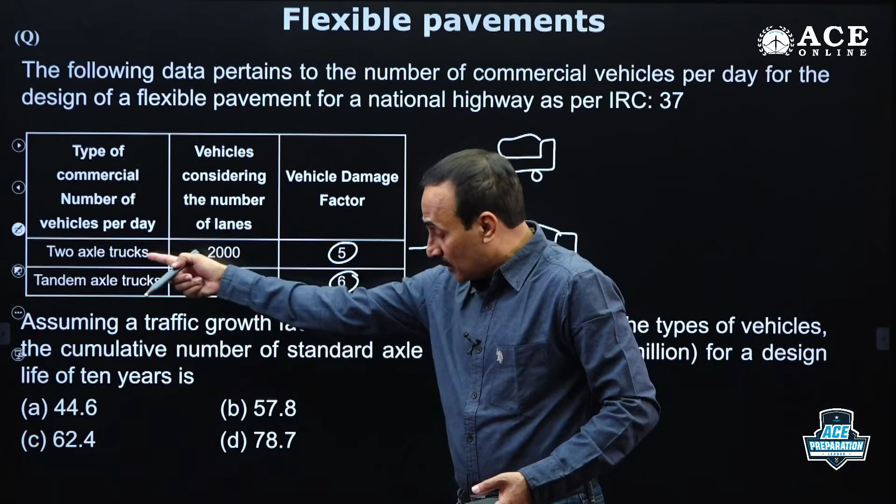2000 two axle trucks are there, 200 tandem axle trucks are there. They have given the growth rate as 7.5% and the cumulative number of standard axles they are asking you to calculate in million. Life of the pavement is 10 years. So you have two categories of vehicles.

Cumulative standard axles equals 365 by rate of growth of commercial traffic, times 1 plus rate of growth of commercial traffic, power life of the pavement, minus 1, into A1, D1, F1. Two categories are there, A2, D2, F2. So substitute all as per the data, we will get the answer.

Based on this formula, what is the rate of growth given for us? 7.5%, but you need to use it as a ratio. 7.5% means 0.075, use it as a ratio. Life of the pavement is given as 10.

What about A1, D1? A1, D1 is nothing but number of vehicles multiplied with distribution factor. Actually in the second column of the table, whatever they have given is vehicles considering the number of lanes. Have you observed this? That means this 2000 is A1, D1, and 200 is A2, D2. Directly after multiplying with the distribution factor, the values are given. This is A1, D1. This is A2.

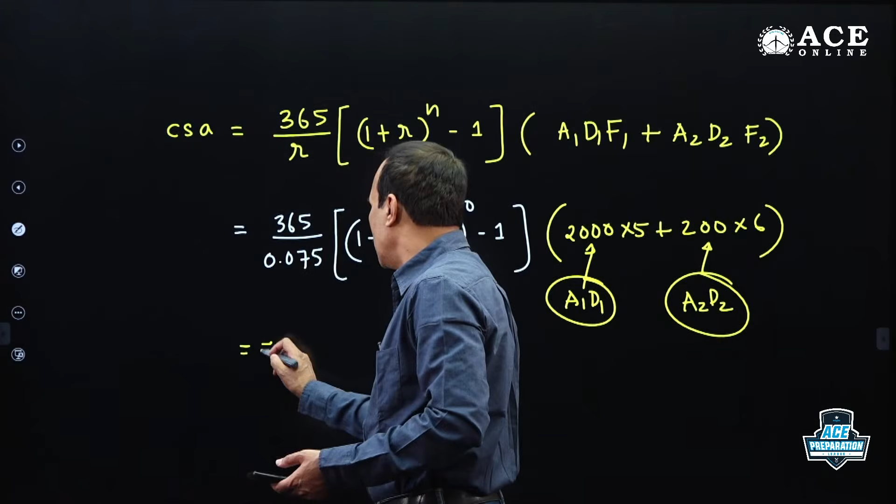57.8 million standard axles are coming. This may be 57.8 into 10 power 6 cumulative standard axles. So 57.8 millions of standard axles. Million is 10 power 6. So this many millions of standard axles can move on the pavement in a life period of 10 years. That's what we expect, and then we design the pavement. Okay, please.

Critical combination of stresses, questions may come on this. See this question and tell me the answer. Let us see how many of you tell me the answer directly.

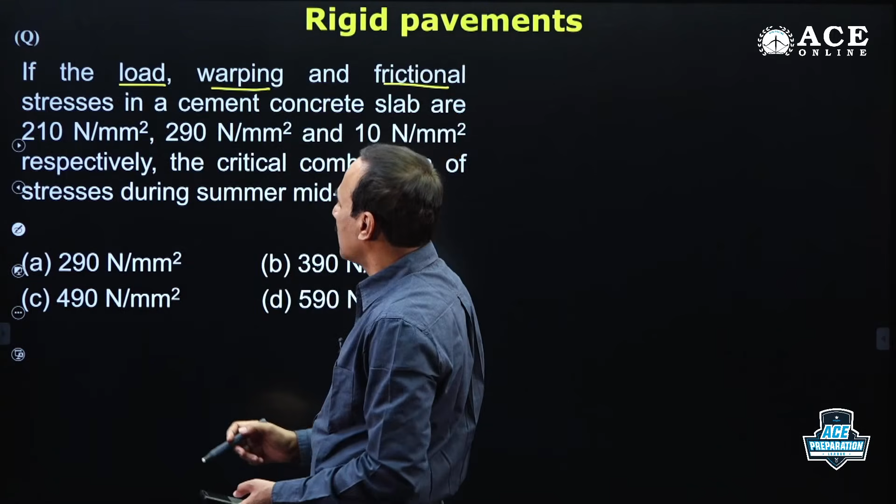Time is ticking up. 7:32. So the load stress is given, warping stress is given, frictional stresses are given. This is load stress, warping stress, frictional stress. They are asking you the critical combination of stresses during summer midday.

Answer is there. Newton per mm square, megapascal. Like that, if you know the formulae, it's straightforward.

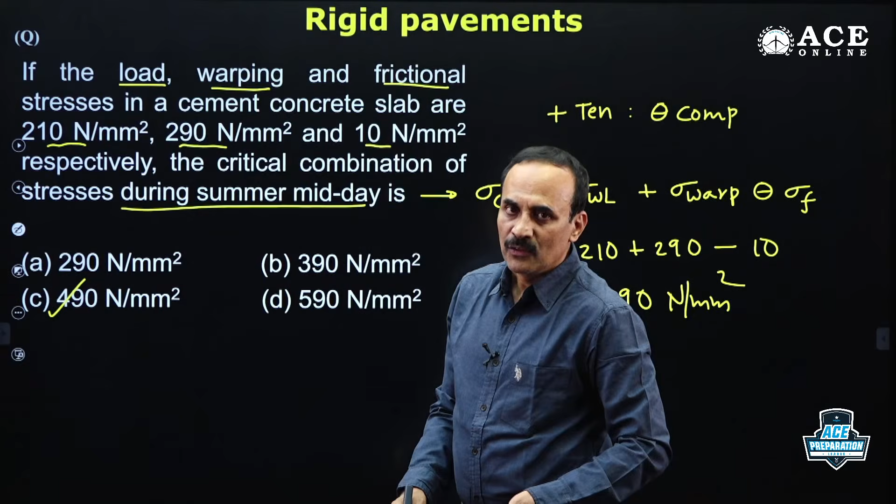If you want to get 50 to 60 marks, only practice to the point, formula oriented questions. If you are not getting 60 marks, you ask me. If you want to score more than that, you need very rigorous strategic preparation. So for average people, what I mean to say is, just go through the standard cases, standard answers, standard way you practice, you get the answer. You get 50 to 60% of the marks out of 100. So if you just qualify, you can join MTech with stipend. That is the speciality of the GATE exam.

In a concrete pavement, whether near edge or interior, this is a theory-based question, slightly critical and sometimes confusing. They are asking you about near edge or interior, but interior and edge both have the same nature of stress, so no need to worry about it.

Temperature stress is tensile at the bottom during daytime. If they ask you about day and night, that is nothing but warping stress. Day-night variation is warping stress, while summer-winter variation is frictional stress. So load stress is tensile at bottom.

Actually, during daytime, the top surface temperature is high, so the top layer expands more. During the daytime, with sunlight, the slab wants to warp like this, but the self weight prevents this warping. It wanted to warp, but self weight stops it. That's why on the interior and edge, we get tension on the bottom.

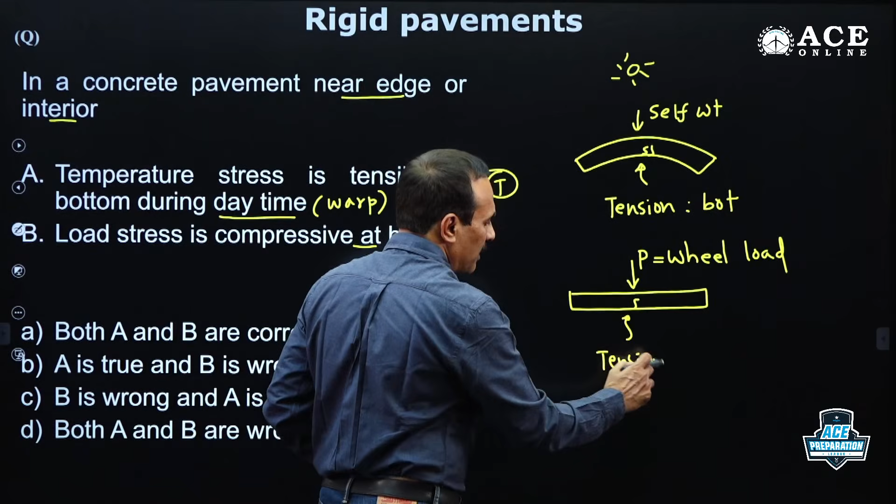Wheel load stress and warping stress will be of the same nature. Why does this stress come? Because you prevent the warping, stress is generated. This is direct load, while temperature stresses are indirect stresses. If you prevent free movement or free warping, we get stress.

So during daytime, you get tension on the bottom at the edge or interior. Due to wheel load also, you get tension on the bottom at edge or interior. So load stresses are compressive at bottom is a false statement.

You are strong in transportation. It's a simple subject, easy to score, easy to get marks with a little practice. So concentrate.

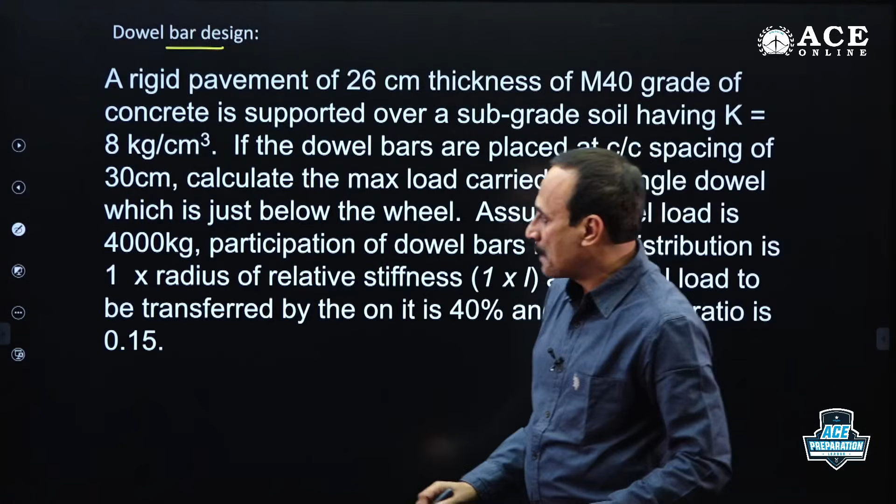Design of dowel bar: the critical dowel bars we provide at the expansion joint, fixed at one end, free at the other end. This is a simple question to find out the load on the critical dowel bar. I am not going to solve this. These dowel bars are kept on the longitudinal, at the expansion joint. This is a longitudinal joint, and this is a critical dowel.

Once the wheel load is at the critical dowel near the edge, the load distributes over some length. This dowel is subjected to maximum load, the next dowel to lesser load. This length is usually taken as the radius of relative stiffness, so 40% of the wheel load goes onto this dowel group.

A similar question was there in the previous GATE exam, so just solve it once. This type of question is important. As I am falling short of time, I am leaving this question, but go through it.

This is also a question on the tie bars. Where do you provide tie bar? Tie bars are provided at the longitudinal joints, along the longitudinal joints. A tie is a tension member, fixed at both ends.

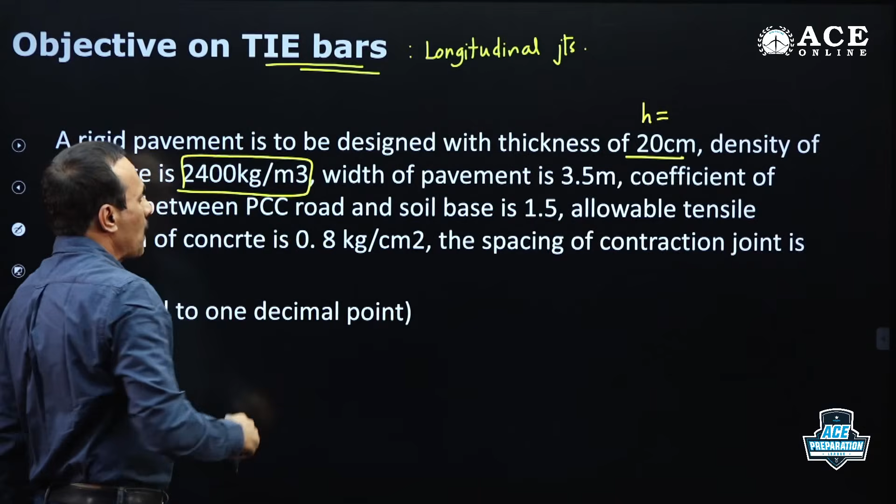What is given here: a rigid pavement is to be designed with thickness of 20 centimeter, so H is 20 centimeter. Density of the concrete is given as 2400 kg per meter cube. Width of the pavement is given as 3.5 meter.

The coefficient of friction between PCC road and soil is 1.5. Actually the pavement is directly resting on the soil, so friction is very high. To reduce the friction, we put a polythene sheet on the soil and then pour the concrete, reducing friction a little, but not too high. The allowable tensile strength of the concrete is given as 0.8 kg per centimeter square.

The spacing of the contraction joint, rounded to 1 decimal point, is asked. You can simply substitute in the equation: frictional force equals resisting force. Coefficient of friction into density of concrete into width into thickness into length by 2. Who is resisting this? The tensile strength of the concrete, with critical cross section B into H. Substitute all and find out what L is here.

Just be careful with units. I will substitute in a different way so that I keep the same units on the left side and right side. Gamma C, density of concrete, is 2400 kg per meter cube, I keep it as it is. Width I will keep in meter, which is 3.5 meter. Thickness is 20 centimeter, I will keep it in meter. Length will also be in meter, divided by 2.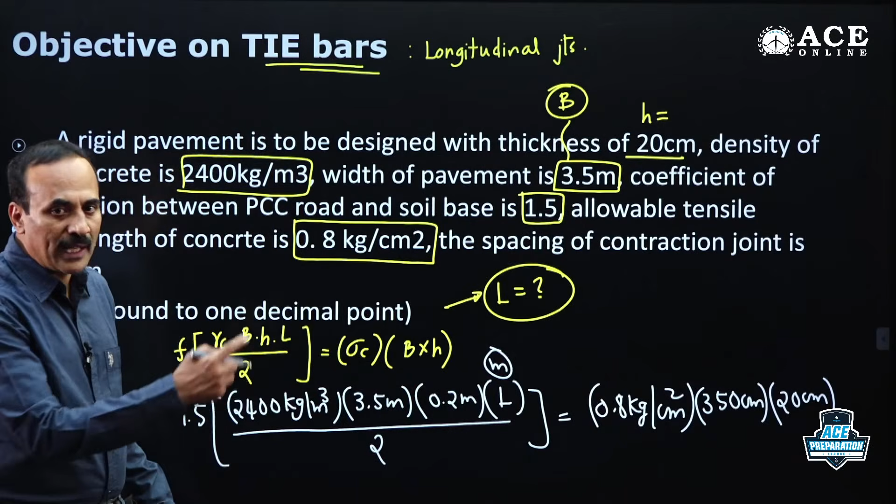Practice makes everybody perfect. What is the tensile strength of the concrete? 0.8 kg per centimeter square. This is kg per centimeter square. Width I will substitute in centimeter, 350 centimeter. Thickness also in centimeter. The fancy part is, what is the right side unit? Resultant unit is kg per centimeter square into centimeter into centimeter. Right side unit is directly kg. What is the left side unit? Kg per meter cube into meter into meter into meter is also kg. Left kg, right kg, finally we get length in meter. Simplify and tell me the answer.

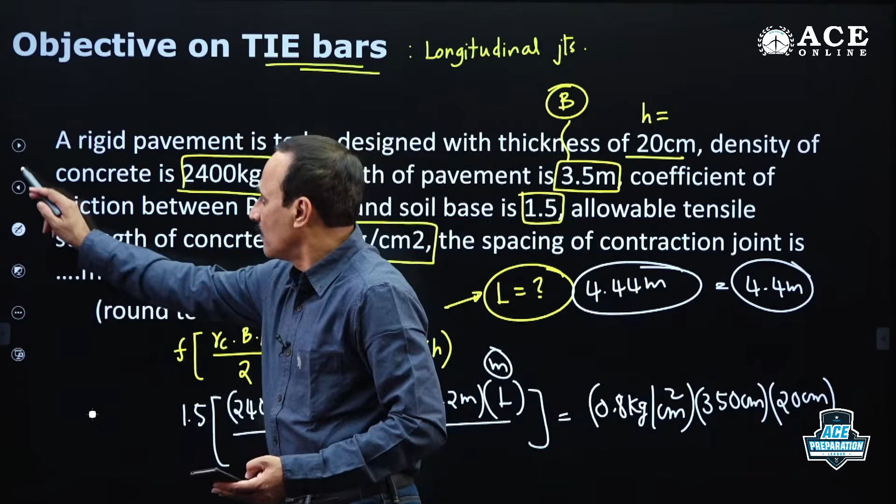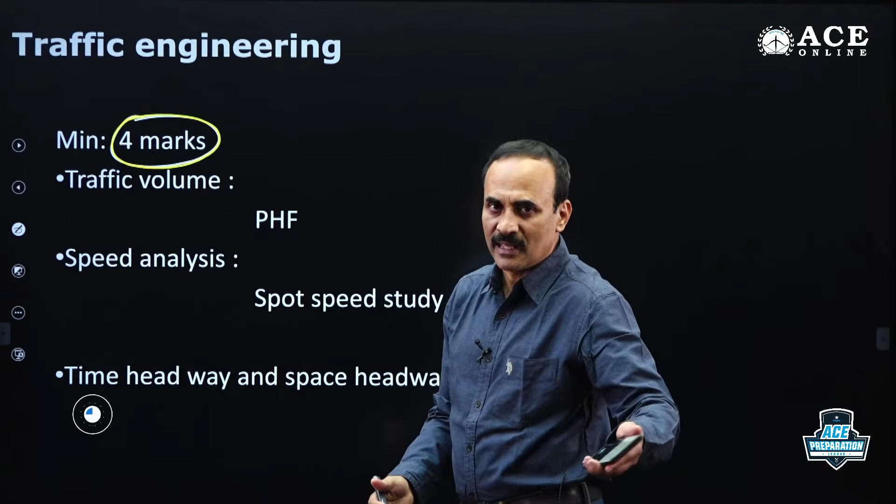So traffic engineering will be causing a little traffic jam. There is a chance of every now and then a new question coming into the picture, because most of you might have studied traffic in a limited manner in your curriculum. But the people setting the paper are experts, and those experts think critical concepts for us may be easier concepts for them. So every now and then they bring a new question, one bouncer from traffic. Be careful about it. We can't research the traffic and prepare, but within our limitations, be cautious to prepare based upon the previous year questions. Beyond the previous year questions and beyond the syllabus, if you prepare, sometimes it may be a waste of time, and sometimes it may cause tension in the brain. Mentally prepare that there may be a chance of one bouncer from traffic that creates the traffic jam. So minimum 4 marks are coming from traffic - very good area. Because if you go to any IITs, there are 2 streams: one is design stream and the other is traffic analysis stream. Usually IIT Mumbai people are very strong in traffic analysis, and from a pavement design point of view, Kharagpur. No alternative for that. So people share the total transportation syllabus into 2 equal parts - geometric design and pavement design in one part, traffic in the other part. That's why they give almost equivalent weightage - 4 marks almost.

Be careful about the basic traffic parameters like traffic volume, traffic density and speed. In traffic volume, peak hour factors - very commonly people are asking nowadays, calculation of peak hour factors. Concentrate more on the peak hour factor. Coming to speed analysis, there is a chance of spot speeds - they may ask you to calculate time mean speed and space mean speed. Time mean speed is a direct mean, space mean speed is a harmonic mean of the spot speeds. This is an important area.

Next is time headway. Time headway is the time gap between 2 successive vehicles, it is nothing but the reciprocal of traffic flow. Space headway is the space gap between 2 successive vehicles, it is nothing but the reciprocal of density, traffic density. Traffic density is number of vehicles per kilometer length. Space headway is the kilometer distance between one vehicle and another. Time headway is reciprocal of traffic flow, Q. Q is vehicle per hour and time headway is hour per vehicle - if you want, you can convert into second per vehicle or minute per vehicle also. So these 2 are microscopic parameters, and Q, K and V are macroscopic, big parameters.

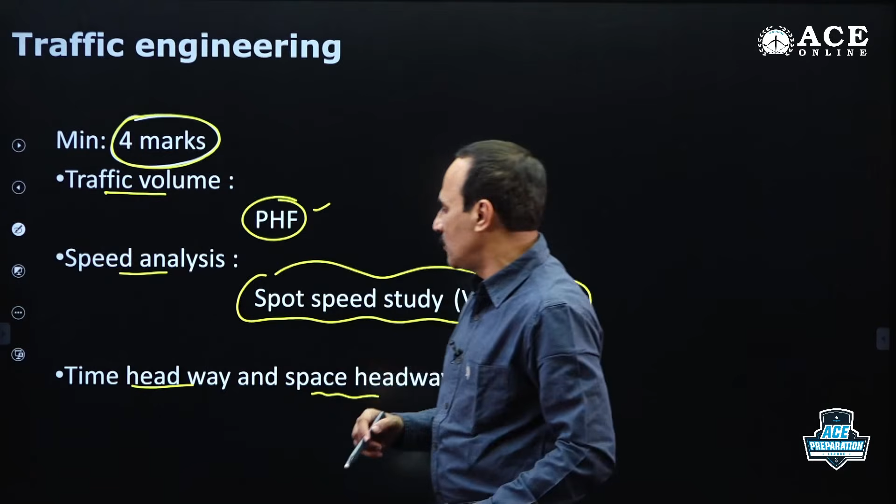Concentrate on peak hour factor, space mean speed, and time mean speed. Afterwards, you have to be very careful about the linear speed density relation given by the Greenshield model. Almost every alternate year, a question comes from the Greenshield model.

If the question comes in the morning session, the afternoon session may not get it. They'll give you a question on traffic signals. If a question is not coming on traffic signal, they'll give a question on this. If the question is not on Green Shield, there may be a chance of a signal problem. So it's very easy to predict questions, both important and routine ones. I told you there is a chance of one bouncer from traffic.

Next is signal design. Optimum cycle length is very commonly asked using Webster's formula, and Webster's delay. Nowadays, without much delay, they are asking questions on Webster's delay also. Either you can use the graphical approach or the formula, but you should be able to solve the problem very quickly. Webster's delay is very important, and Webster's cycle length calculation is slightly less important, but questions repeatedly come on this. So either the question may come on signal design or on the Greenshield linear speed density approach.

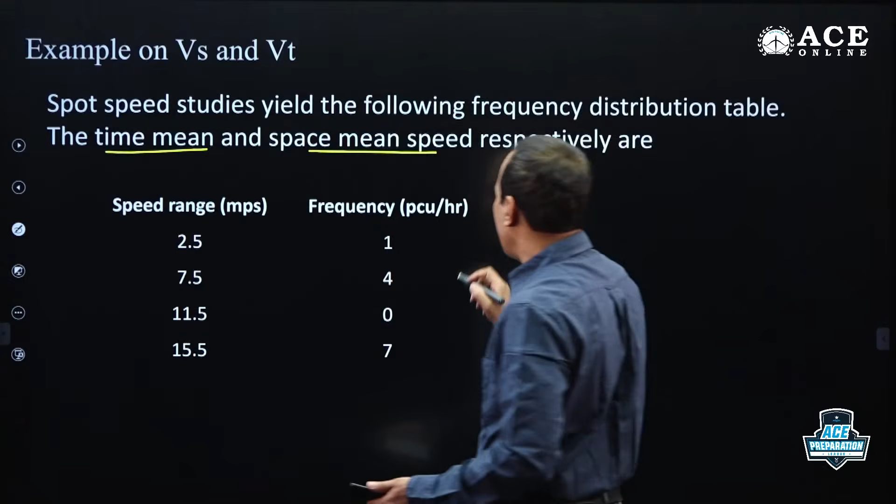Spot speed studies yield the following frequency distribution table. They are asking for time mean speed and space mean speed. Time mean speed is the direct mean of all spot speeds. How do you calculate the direct mean of all spot speeds? This table is given: 2.5 meter per second for 1 vehicle, 7.5 meter per second for 4 vehicles, 11.5 for 0 vehicles, 15.5 for 7 vehicles. The average options are there. Time mean speed is 2.5 into 1 vehicle, plus 7.5 into 4 vehicles, plus 11.5 into 0 vehicles, plus 15.5 into 7 vehicles, divided by total number of vehicles. Direct mean: 1 plus 4 plus 0 plus 7. Somebody please give me the answer.

Yes, Paran Raj. Greenshield model is as you told.

Shockwave equation, Sunny, there may be a chance of one question previously asked. Shockwave may come because of sudden application of the brake of a vehicle in a traffic stream. So a shockwave is indicated by increase in density and decrease in speed. If the density is increasing and the speed of the vehicles is reducing, that's a shockwave. Shockwave may come because of sudden application of brake of a vehicle while moving in a stream, or otherwise sudden reduction of the width of the road will give you the shockwave.

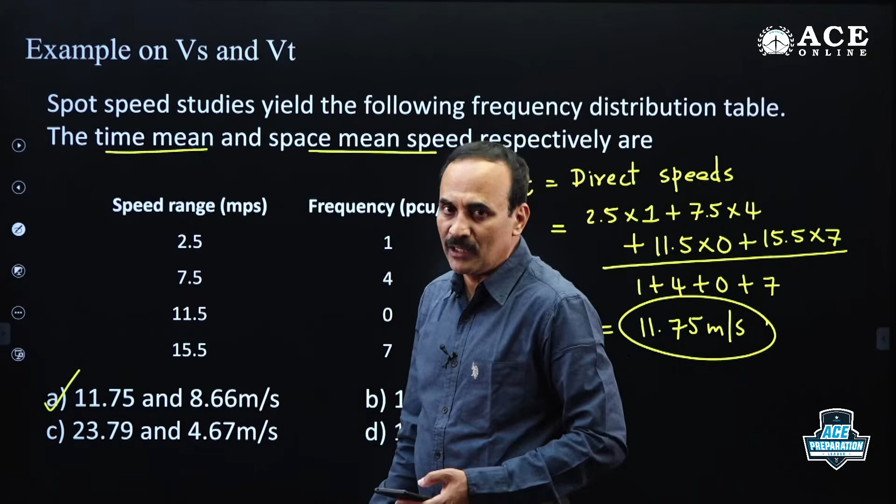Sometimes you need to use logic to reduce your workload.

This is also a multiple select question. Try this please: Greenshield model. On a road with linear speed density, meaning Greenshield model, speed is 65 kmph. Space headway at jam density is 6.25 meter. Which of the following statements are correct?

Maximum flow, Qmax, they are asking. Qmax is nothing but maximum speed by 2, times maximum density by 2. What is speed? 65 by 2. The Kmax is actually, space headway is given, Kmax is 1000 by space headway. Space headway in meter per vehicle. So this can be 1000 by space headway of 6.25 meter between one vehicle to one vehicle, by 2.

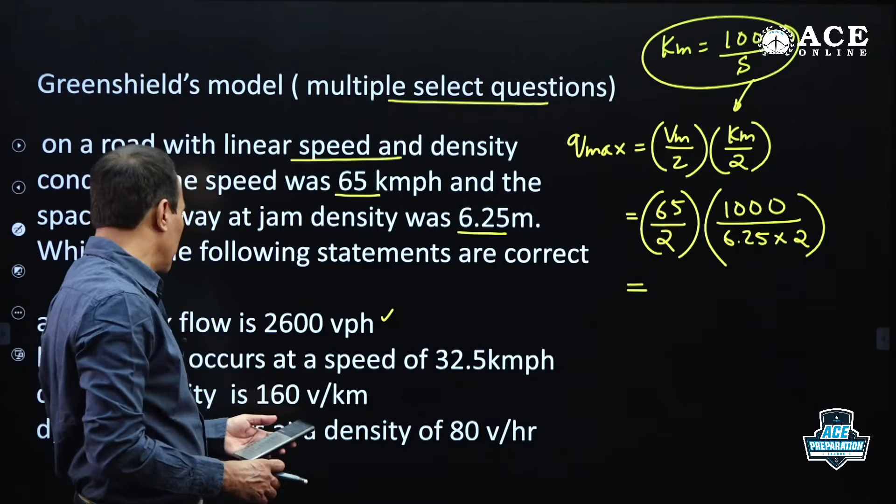So is it 2600 vehicles per hour? Option A is correct. Maximum flow occurs at a speed of 32.5 kilometer per hour. Maximum density, is it 160 vehicle per kilometer? This is Kmax: 1000 by 6.25 is 160 vehicle per kilometer. Okay, correct. That means C is also correct.

Maximum flow occurs at a speed of Vmax by 2: 65 by 2, nothing but 32.5. Maximum flow occurs at a density, Qmax occurs at a density of 160 by 2. This is also correct, yes. Ashok, correct, all are correct, Prasad. Perfect, perfect, perfect.

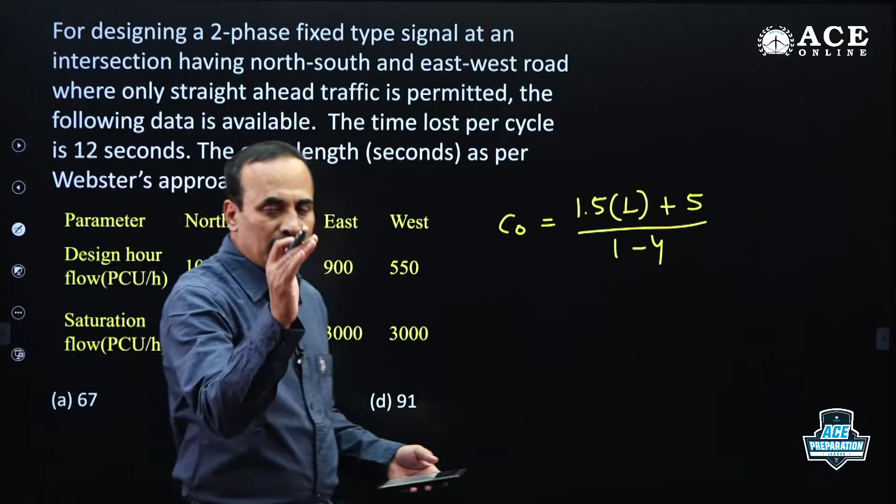I'll upload this PDF, you can try to solve it. This is based upon Webster's cycle time: C0 = 1.5L+5 / (1-y), where L is lost time per cycle and y is the sum of ratios of normal flow to saturation flow of various phases. Here you will get the answer as 77.

The highway material and testing theoretical questions will come from this area, so you may get 1 or 3 marks, most probably 1 or 2 marks. Here you need to concentrate on the aim of the experiment, apparatus used, and simple specifications.

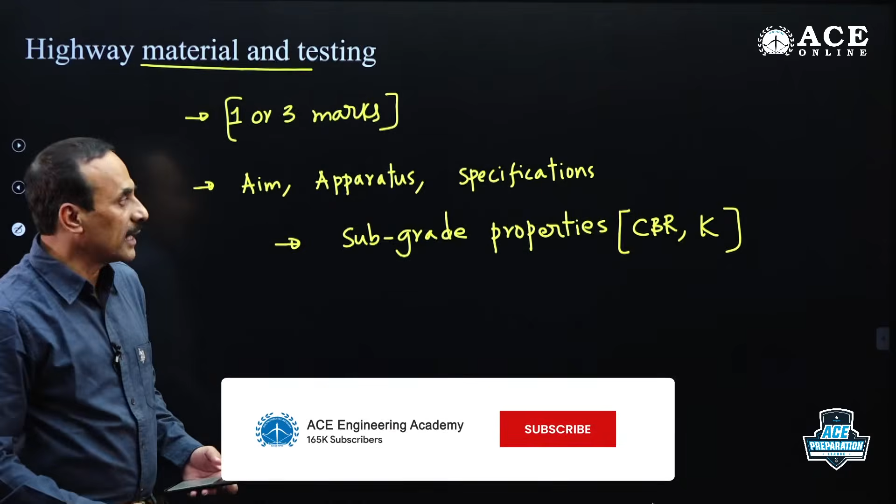No need to go through the stepwise procedure of each experiment from a GATE point of view. You can classify highway material and testing into subgrade properties. We will talk about CBR and modulus of subgrade reaction. CBR is done by CBR test, and modulus of subgrade reaction K can be calculated by plate bearing or plate load test.

Next is aggregate properties like toughness, hardness, strength, specific gravity, water absorption - all the aggregate properties you need to go through, along with the experiments and specifications as per IRC code.

Next is bituminous properties - bitumen properties like softening point, viscosity test, ring and ball test, flash point, fire point test. All these tests you need to go through: aim, apparatus and specifications as per IRC.

So in highway material and testing, Marshall mix design, especially the calculation of voids filled with bitumen and voids in mineral aggregate - these calculations are very important. Every now and then questions come on this. See the previous year GATE exam questions and concentrate on this.

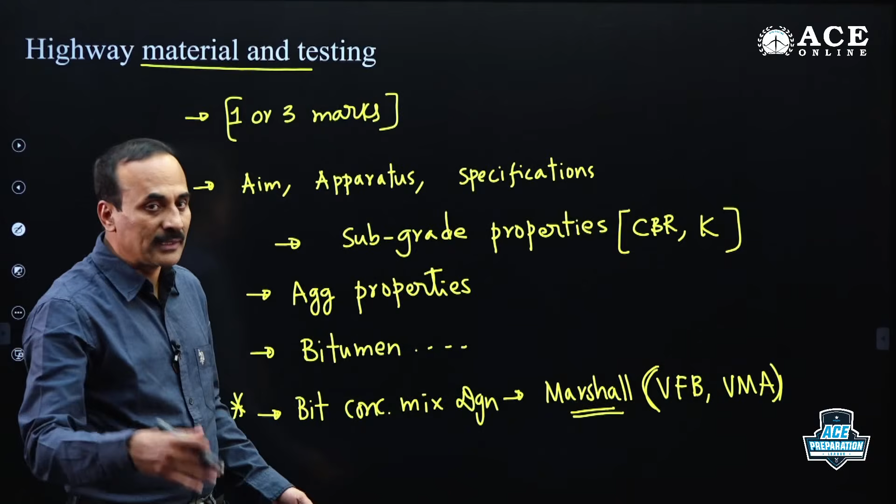Because of time constraints I am not going into the details. So this is highway material and testing - simple questions may come from this area, based upon the CBR test. Concentrate well. Apart from this, you have airport engineering.

In airport engineering we have to concentrate on only two parts. One is runway length calculations and corrections.

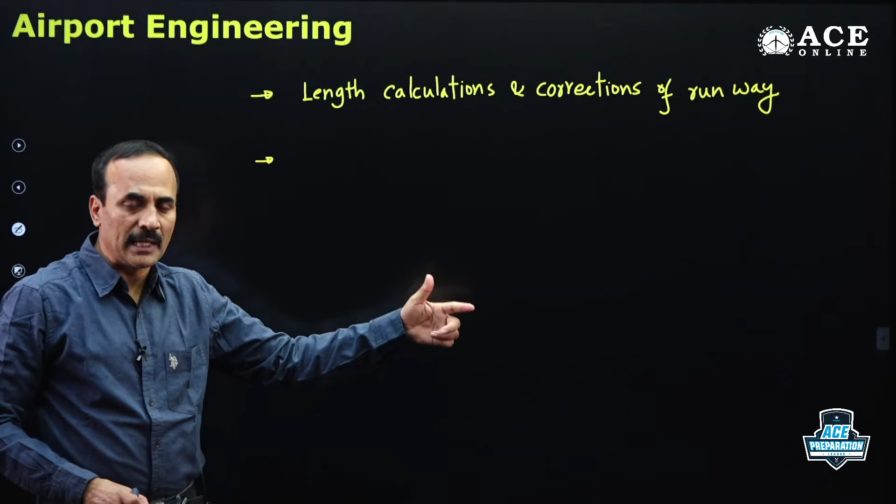Length is calculated based on normal landing, normal takeoff, and emergency stop conditions. Among the three, we pick up the maximum.

After that, we go for corrections - elevation correction, then temperature correction (sequence is important), and third, gradient correction. Very, very important for us.

And afterwards we need to go for exit radius of taxiway - very, very important for us. There are three conditions: comfort condition, and next Horonjeff off-tracking condition.

Next is ICAO specification, ICAO specification for airports - ICAO specification especially for supersonic and subsonic aircrafts, we have specifications given.

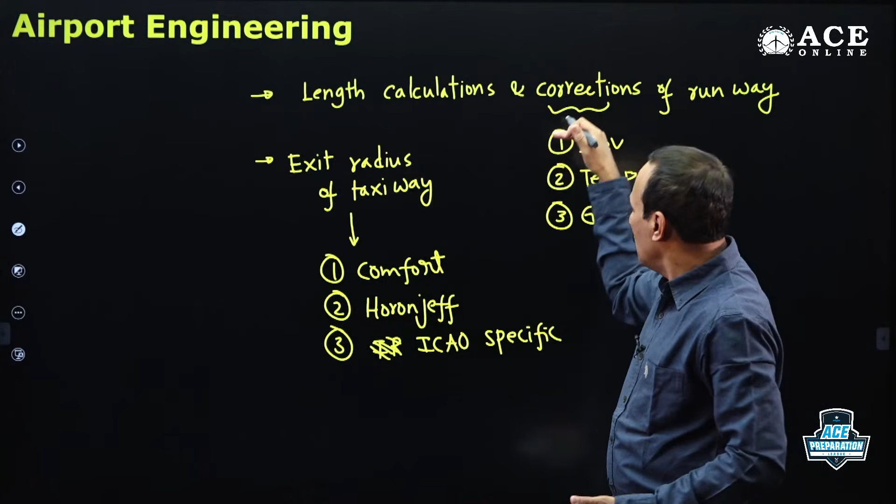So in airport, concentrate only on length calculation based upon normal landing, normal takeoff and emergency stop condition, plus the three corrections, and then in taxiway, exit radius - that's it. Railway will be discussed along with survey by some other faculty. These are the areas I wanted to touch.